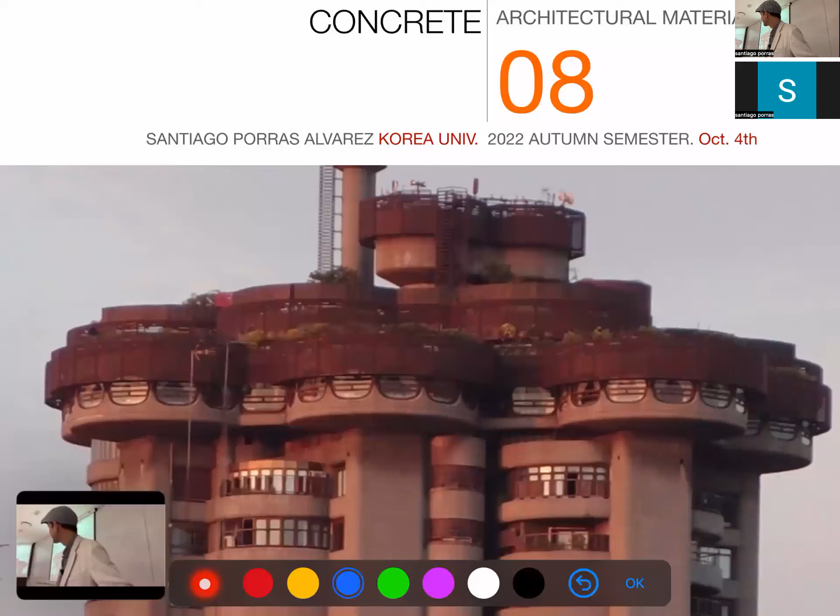So today we will try to go into concrete as a material.

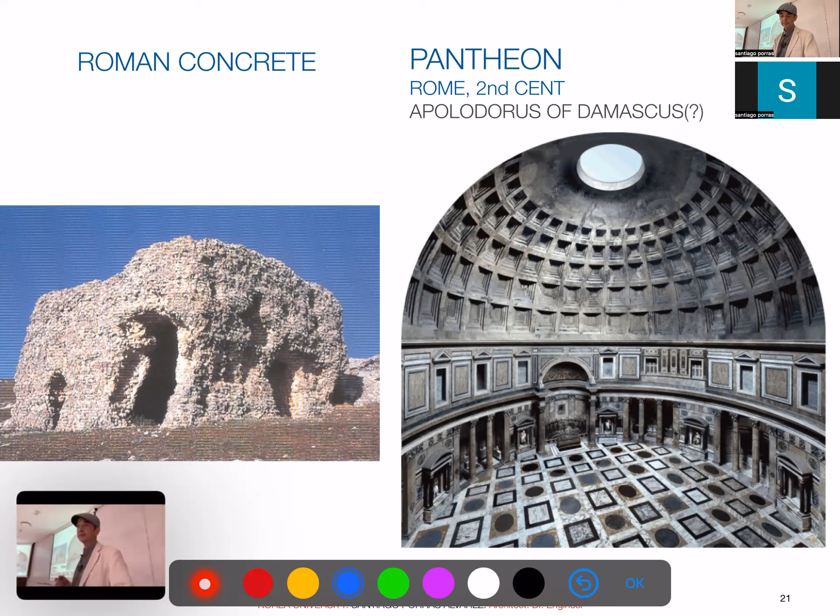Modern concrete actually started to be used at the end of the 19th century, into the 20th century. The first project trying to use the plastic possibilities of concrete was by Erich Mendelsohn, a great architect: the Einstein Tower in Potsdam.

Ironically, the technology was impossible at the time, and they had to build it in brick and then render it with cement. So the most influential concrete building is actually made of bricks, which also says something in favor of bricks.

It is engineers who really started to figure out how to use this material and who developed all the mathematics we use today to calculate it. Maillart was one of them, a Swiss engineer, and his bridges became famous — they are actually still in use.

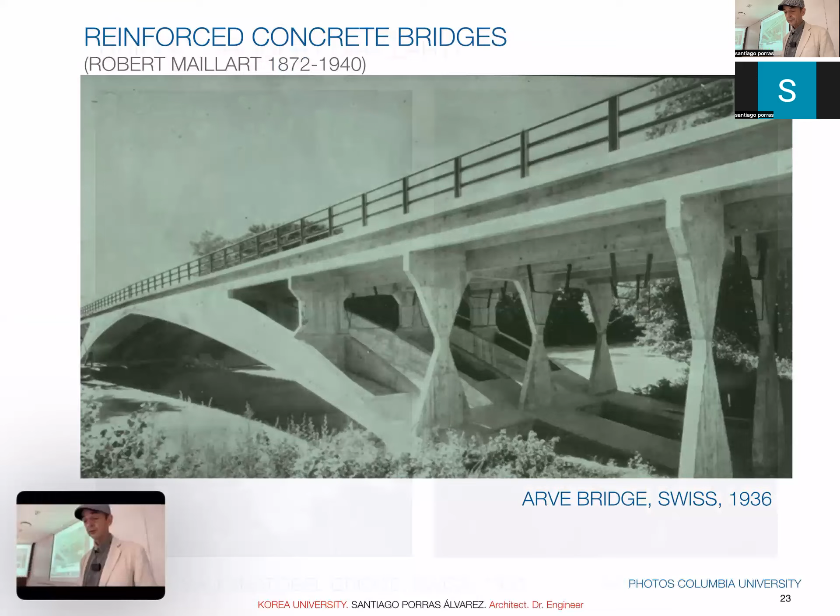Something we learned very fast is that concrete, as it has been poured and formed, creating that form was as much a challenge as the structure itself.

So whenever you have something interesting or unique in concrete, the auxiliary structure is usually as difficult an engineering challenge as the concrete itself. And this is also a limitation of this kind of material.

We have to go to the early 20th century, together with Mendelsohn, to Auguste Perret, who was the master of Le Corbusier. He was one of the first to use concrete seriously, for engineering works like factories and bridges, and he did something unbelievable.

He made a big church out of concrete in France. That was a scandal, but as often happens in France, that scandal became an advancement in science and art. And then it became like a normal material.

We have Le Corbusier's domino system and the normal skeleton construction. One milestone is 1965.

We have SOM — this Kahn is not the architect, he's an engineer. They found the tube system.

That means a kind of perforated tube, made of concrete, a concrete grid, which creates a very strong structure for skyscrapers. It was competitive with steel for about 30 to 35 floors. And again, this is a typology we can still see today.

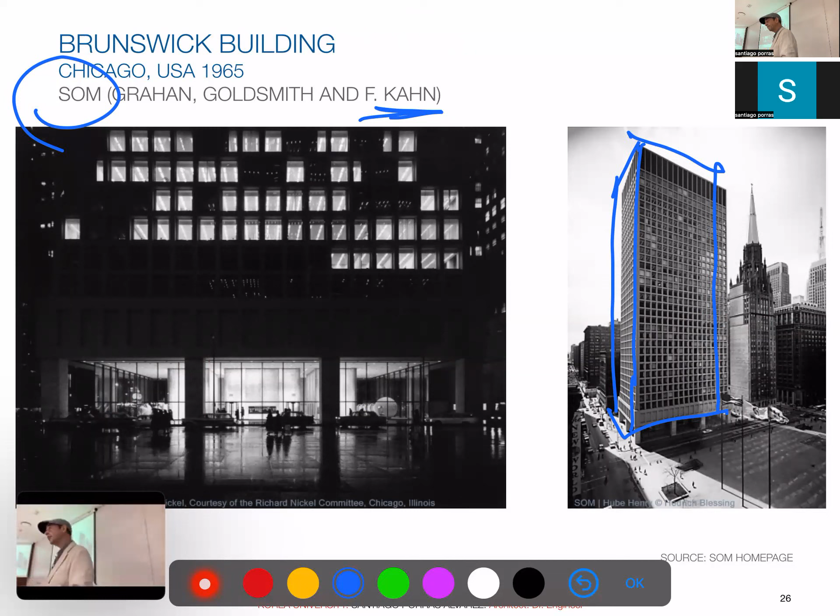Of course, Le Corbusier was kind of an apostle or evangelist of concrete, both for its structural and its plastic properties.

It went to Japan, which was also becoming very good at this. In the 1930s, the Japanese were the first to build full earthquake-proof buildings in concrete. Some old Japanese buildings in Seoul, like today's artist house in Hyehwa or the School of Medicine, are this kind of concrete structure, which was very innovative, among the very first ones. Le Corbusier was quite upset because the Japanese were too precise and it lacked the roughness he liked, but still the building is there.

Jørn Utzon, the Danish architect, did many experiments. This one, the Langelinie Tower, was not built, but it's an amazing project which explores the possibilities of concrete for very unique, unsuspected tower typologies.

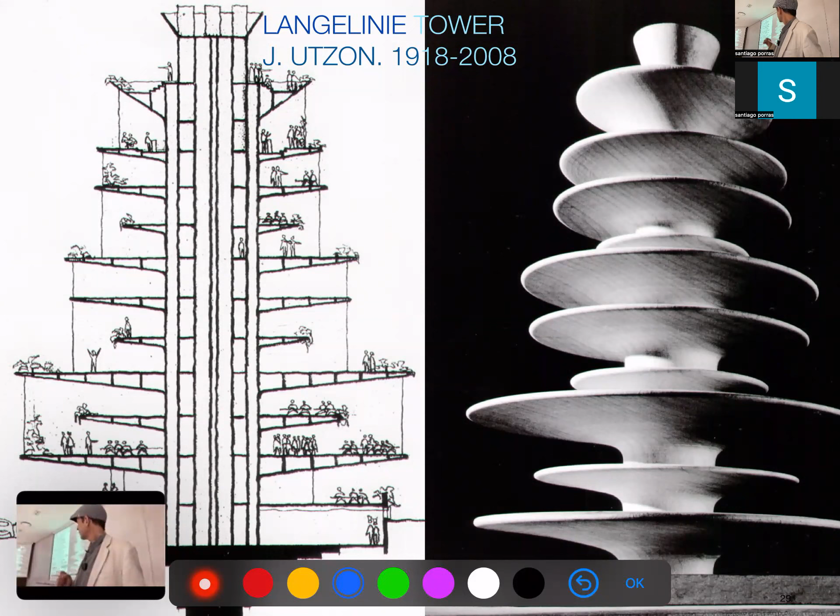I didn't put a date, but probably around 1950. Felix Candela, a Spanish engineer who went to Mexico and stayed there, created another milestone, trying to make very thin concrete shells. Probably his masterpiece was the Bacardi plant in Mexico, from 1959: a 30 meter span, 12 meters height, and just 40 millimeters, 4 centimeters, at the highest point, a bit thicker at the base. It's really at the limit.

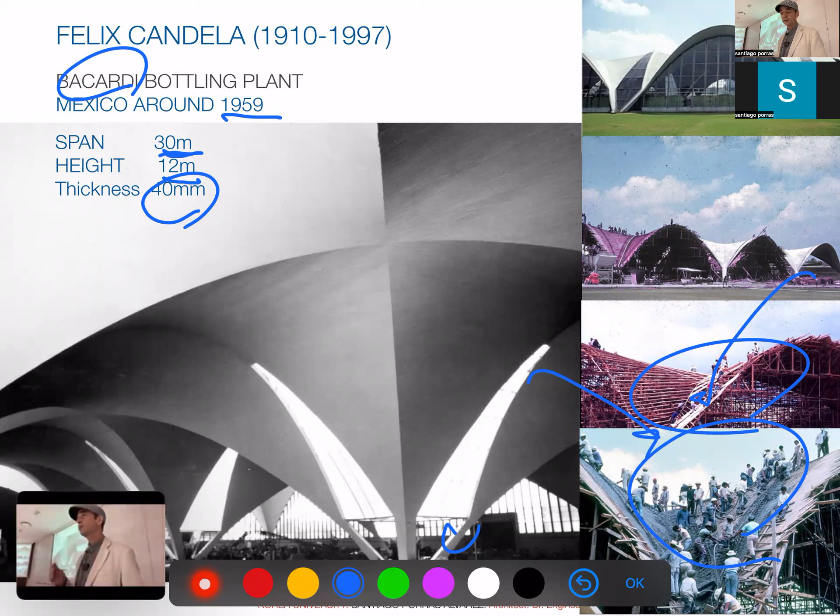From the photos you can see the forming was very challenging, and in 1959 labor was not a problem. These are two reasons why we don't see those shells so often anymore: they're quite expensive to build, and codes are now so strict that those 4 centimeters may not be enough for many issues, especially structural durability. But still it stands, and you can see it. He did many experiments, with the goal of being lighter with concrete, and had to demonstrate the possibilities to convince people those structures were strong.

Those possibilities were taken up by Eero Saarinen, Finnish American, second generation, who used concrete to create a new language of architecture, moving away from the clear engineering dome of Candela toward this kind of flying shape.

Non-surprisingly, Saarinen was in the jury of the famous Sydney Opera House project. Actually, this project was already discarded, but Saarinen said let's go back into it, and he convinced the jury to build it. Utzon was thinking of using the shells Candela proposed for the Opera House. It proved to be a challenge. This is 1957, the late 50s, the golden age of concrete exploration. But notice the time of construction: 16 years.

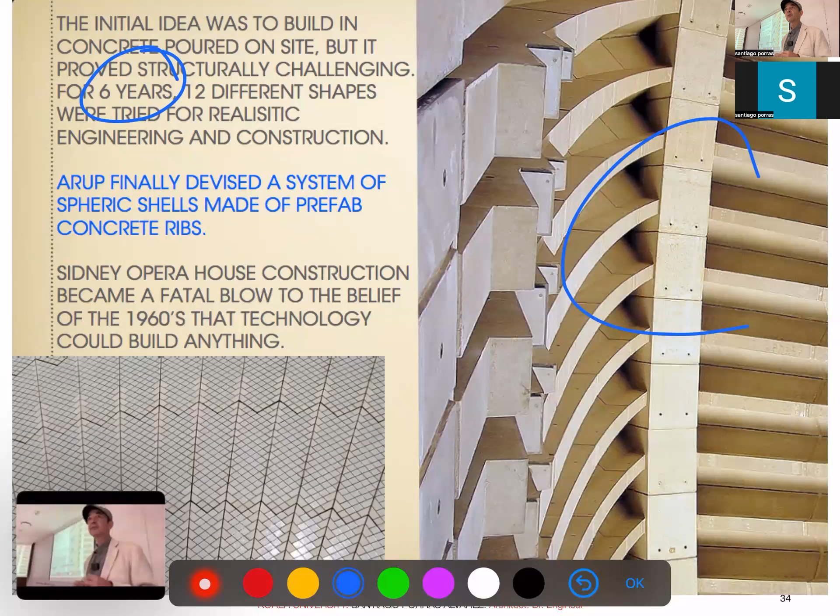The construction of that shell proved impossible for that shape and size, and engineers spent 6 years trying to find a way to build it. In the end it wasn't a shell, but a kind of rib structure. Such a scandal that Utzon was fired. In the 1960s and 70s, people would fire architects; now we just keep them and pay whatever is necessary. It was heavily criticized, but it's still the icon of not only Sydney but the whole of Australia. It marked a point where the optimism of the 1950s and 60s, that we could build anything, went down, and architects became more realistic about what to do.

That feeling remained for 40 or 50 years, until the early 2000s with the Star Architect period.

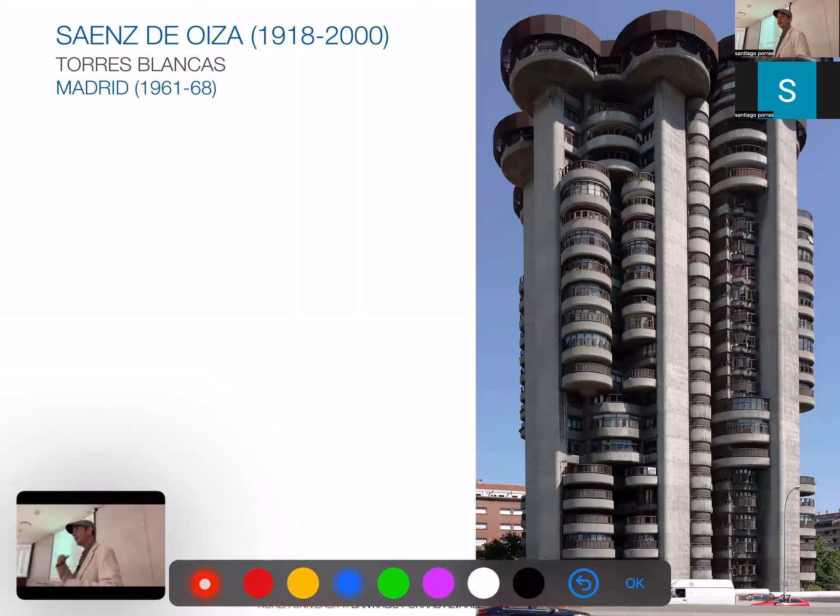Again, in the 1960s, this is Spain. This project used concrete in both its plastic and structural possibilities. Again a very long project, but not as painful as that of Utzon.

Back to Spain: this is Fisac, who was kind of crazy about concrete. He did many experiments, like using textile forms to create a very unusual, surprising, puffy feeling in something that is actually very hard, an approach that today, in the 2020s, has been recovered as something very advanced. He also went into many skeleton structures based on the structure of bones, hollow structures, or very simple prefabrication where very few units create a lot of variation.

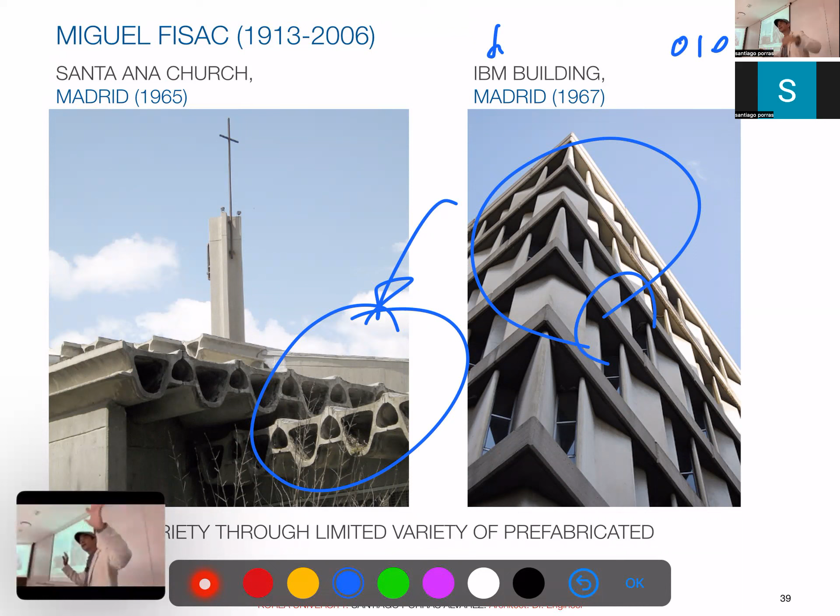IBM building, this is about 0 and 1, right? This is computer science. So he has only two positions of the facade elements, the facade being the metaphor of the computer language. And he did more, using a very simple way of construction to create a very complex shape. This was a very loved building in Madrid, but it was demolished 23 years ago. And the engineering part, not for aesthetics but for use, is also important.

Probably Louis Kahn with Komendant, who is his collaborator. Louis Kahn buildings look simple, but they have a lot of engineering there. The Vierendeel precast beams, which are like a one floor height complete, allow to have all those systems in between the floors, and also have big spans one way.

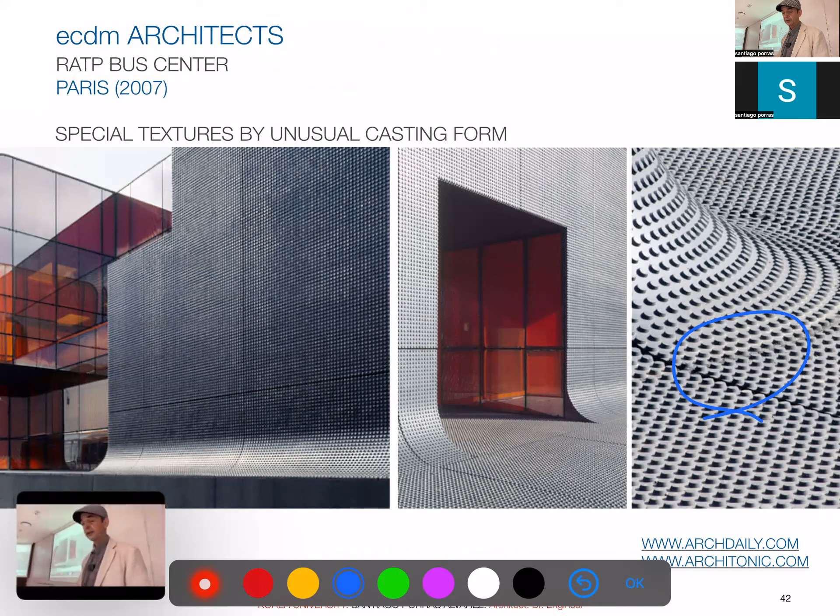Nowadays we are recovering, as we said, this kind of fluffy, soft forms to create unusual textures and light construction, different forms. We have Garcia Abril, we saw before, like more artistic, taking out of context oversized precast elements to create just a simple one-family house, or also taking precast elements out of context. And there's many more possibilities, but things we do today are probably based on those basic things we see there.

So let's go to the material. In that sequence we saw today, we will concentrate on the material, which is enough. Before I took this course, the person teaching before me used to have 10 weeks only on concrete. We'll have hopefully 1 hour, so please listen carefully.

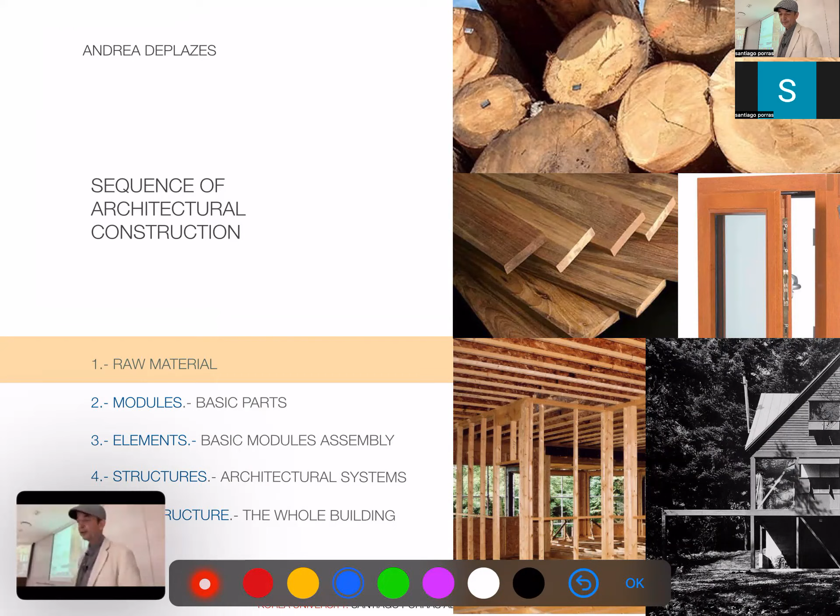Let's go into the material itself. And this is the outline. We'll stop a little bit here. This is where we have a little bit of chemistry to understand the basics, which is very important. Then we go into all the boring stuff, but it's important because knowing the nature of the concrete and how it is made allows you to understand better why we design it, which way, and the possibilities and limitations the material has. We have to start with lime concrete.

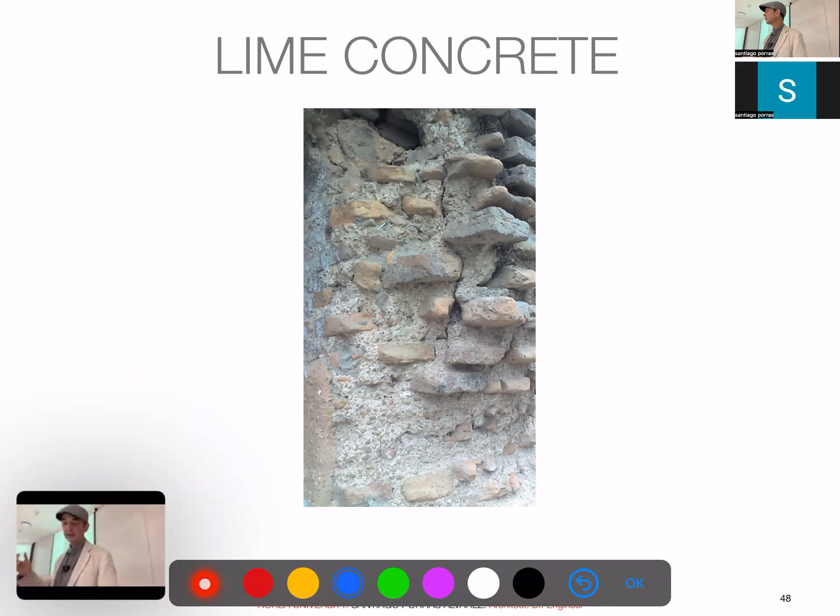And you remember lime is that pure white stone, sedimentary stone we saw, right? This is the lime, the concrete the Romans used. So you have to start from the limestone. And one way is to burn, dehydrate the stone, make it powder, to rehydrate and create a new stone, but in the shape and size we want. Furthermore, we add stones inside, so we have a very efficient use of that material because a small amount of lime produces a big amount of concrete. That's the powder plus the stones and the water, right? And that creates the concrete.

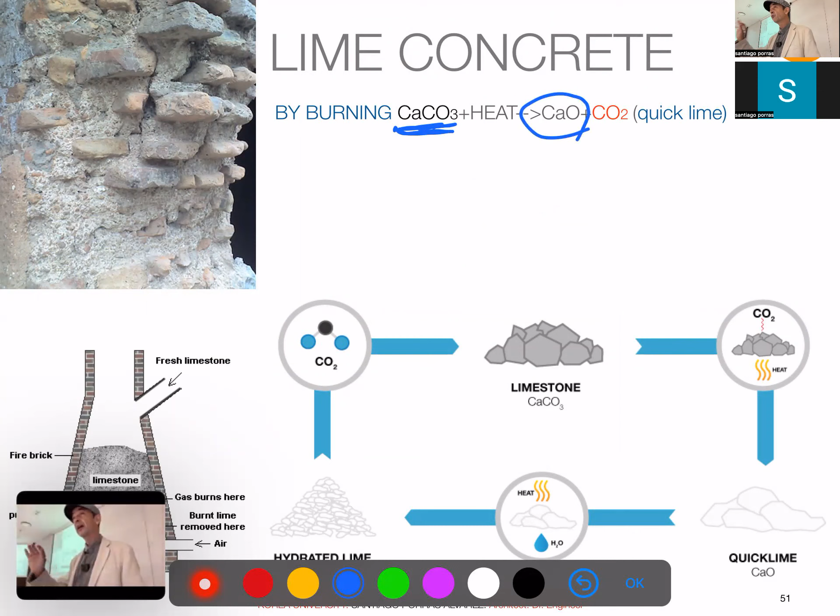This is like an archaeological remains of the Roman concrete. So let's say this is an artificial stone, man-made stone. Lime mortar, as we said, produced from limestone. And we know that limestone is produced by calcium carbonate. This is interesting because it's a very easy chemical to manipulate. The process is as you can see: if you apply heat to calcium carbonate, you create quicklime, which is a very corrosive element, plus CO2.

Environmental people get panicked with this, but do not panic yet. So this is the first time we burn in an oven, the CO2 goes to the atmosphere, there's no way around it, but we have this kind of powder, which is the calcium oxide or quicklime. If we hydrate it, if we add water, we get what we call the hydrated lime, and it releases a huge amount of heat, which also has to be taken into account. So it's a chemical reaction in which we start to reconstitute the element.

But it's not yet the same material, right? We need still the carbon. That carbon comes from the atmosphere, so actually we are capturing carbon. This is the process of hardening, this is why it takes time, it's a slow reaction. So with the absorption of the carbon dioxide from the atmosphere, we have again the calcium carbonate. And this is a process which could be repeated over and over.

Apparently, if you repeat over and over, the material degrades a little bit, but the chemistry is so simple that it's very easy to replicate. Right? This is why metals, I get off topic, but are so easy to recycle. The chemistry is just the atoms together, right? So it is very easy to recycle because there's nothing to degrade. And this is why plastics are so difficult. The chemistry is so complex, those molecules go wrong very easily.

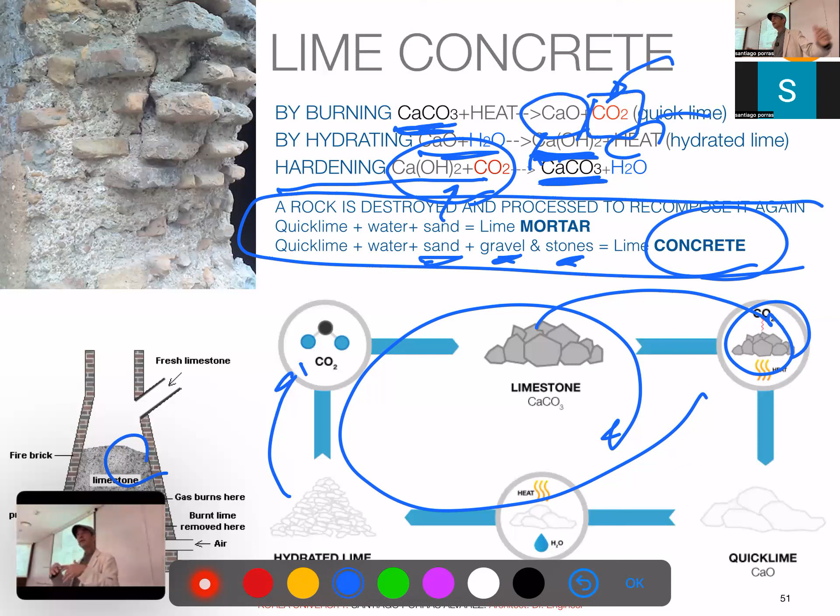We seldom use it. Portland concrete has much more complex chemistry. Not the concrete, the cement, right? So today we use the Portland cement, not the lime. And this is just made of a limestone as a base, but clays, silica, and other materials which create this kind of gray powder we know. And that was discovered to be much harder than the old limestone and much more durable, right?

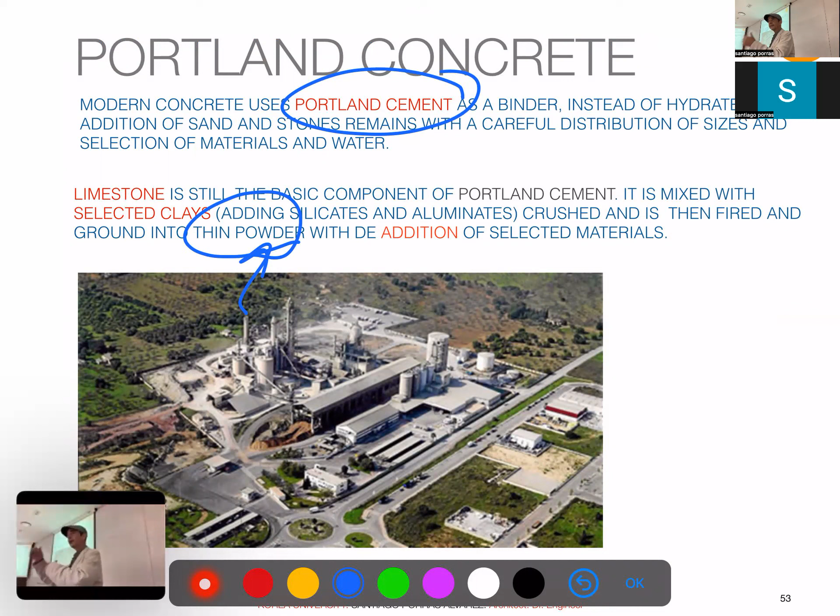So we have the lime, the clays, we burn it, we grind it, then we add other materials. We have what we call the cement, which is the basic glue for today's concrete. And then we'll add, as usual, the sand, the gravel, the stones to make use of it.

Something I put as a note is very side, but alumina is one of the additions people were very happy to put. Remember, alumina makes it stronger against fire, so still we use it. But alumina has a very nasty performance over time, and it can corrode the reinforcements, right, with other chemicals. And it was very used in the 1950s and 60s, up to the 70s, because it was very fast. One problem of the concrete, it takes like 1 month for it to harden to a safe stage, right? But alumina could do it much faster. So it was very popular.

We are much more careful now. I say that because if you work in old buildings, renovation is very common, and we have plenty of those. Probably Korea was using it until the 80s, even later, right? Because here things come a bit later because of the development. Always be careful and test the nature of the reinforced concrete you use to see if it has any kind of damage, right? We do it as a base when we work in Europe or America in buildings from that period.

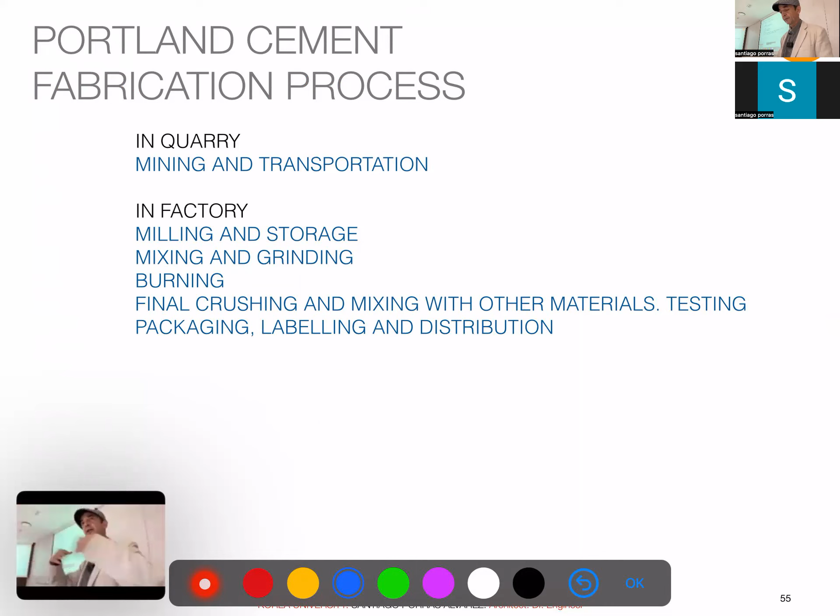So the fabrication process is, I will go fast here because there's not much to understand. We quarry the clays and the lime, we grind them, we burn them, we grind again, we mix with the materials, we have the powder ready for working. So we take, as we saw in the bricks, but this is limestone, right? Limestone is like a real sedimentary rock, and you need dynamite to get it there, to start using it. That creates those rocks which are transported, right, for then grinding them, mixing and making the powder.

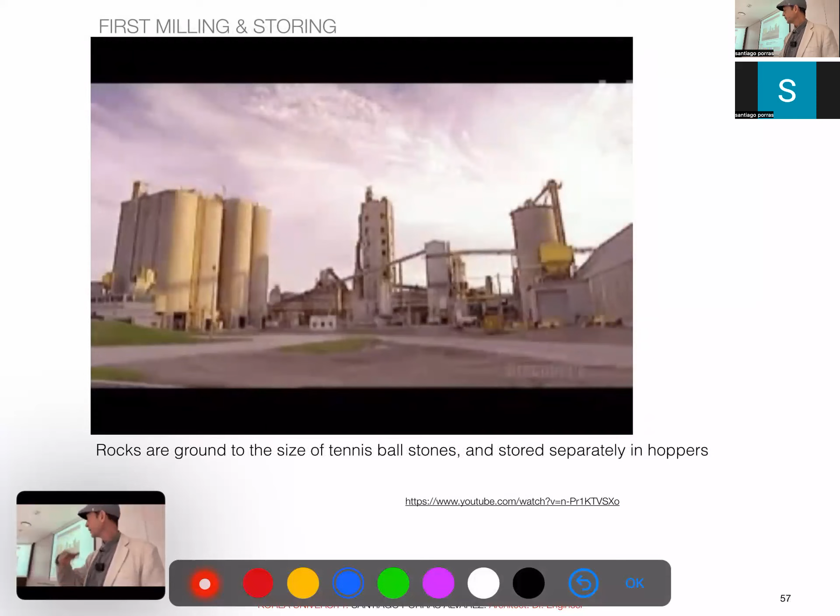So once you have them, they are stored in this process of grinding, storing, and then they will be mixed, right? There's a constant spray of water to keep the dust from billowing up and settling on the chutes. Fortunately, there's no sound because it's a really noisy part of the process.

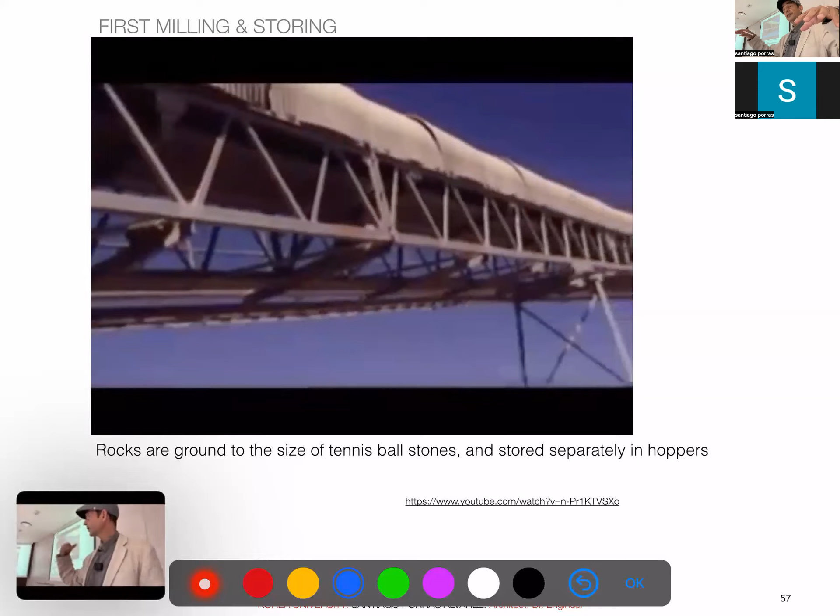So very thin grinding. It's not yet the final grinding, but then it is transported and stored because different kinds of cement will use different mixes of clays, as we saw with bricks, but in this case, it's even more exaggerated. So once they are stored, they are mixed in the proportion necessary for the given kind of cement which we want to fabricate.

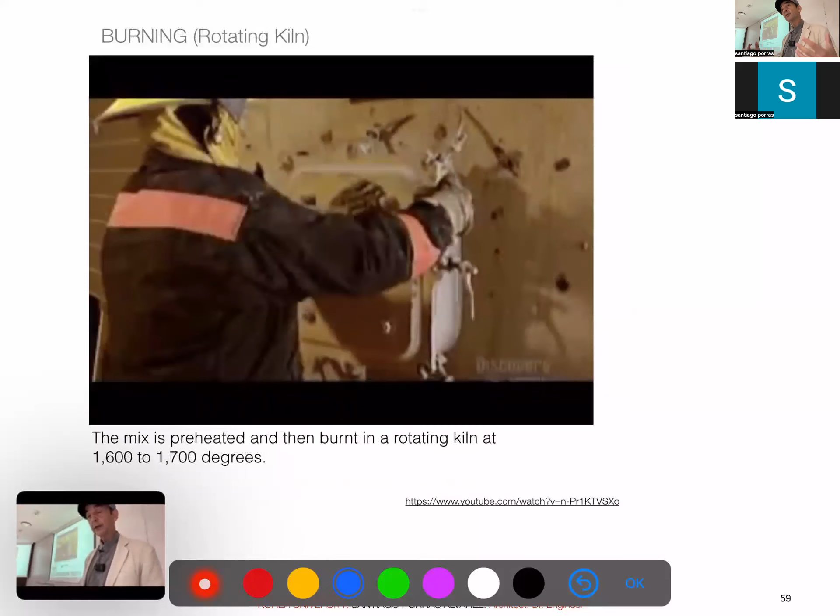Right. And this is other, like pure silica and other materials which are added to the mix. Well, and then it is all burnt together in a very strong, huge oven, which is rotating. It's like a huge tube in which things move slowly and are mixed. And the temperature, you see, it is enormous, much higher than the one we saw in bricks. That means the amount of energy we use is much bigger.

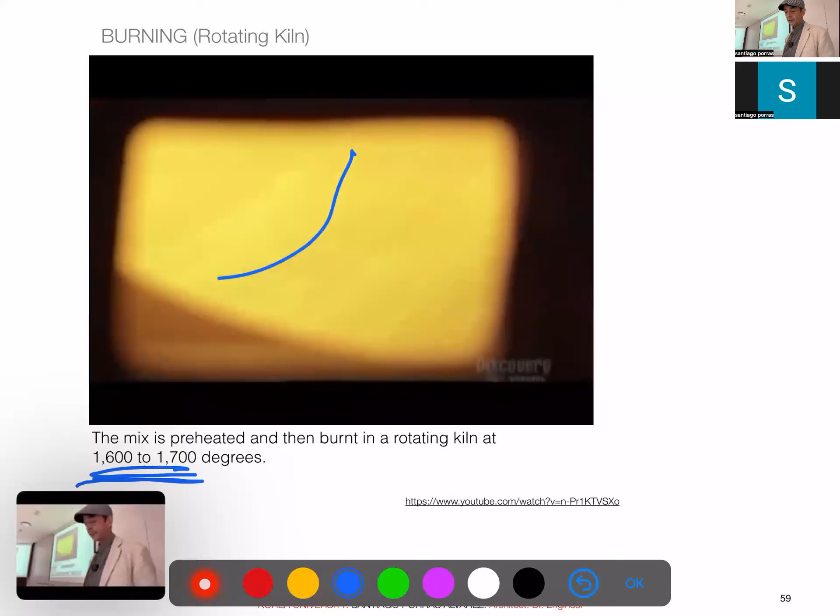And those huge tubes are the typical ovens. This is where the gas with the fire goes. Those are typical of cement production. What goes out is something we call clinker. And be careful, because we call clinker that very high temperature brick, and we call clinker the burnt result of the cement production, but it's two different materials.

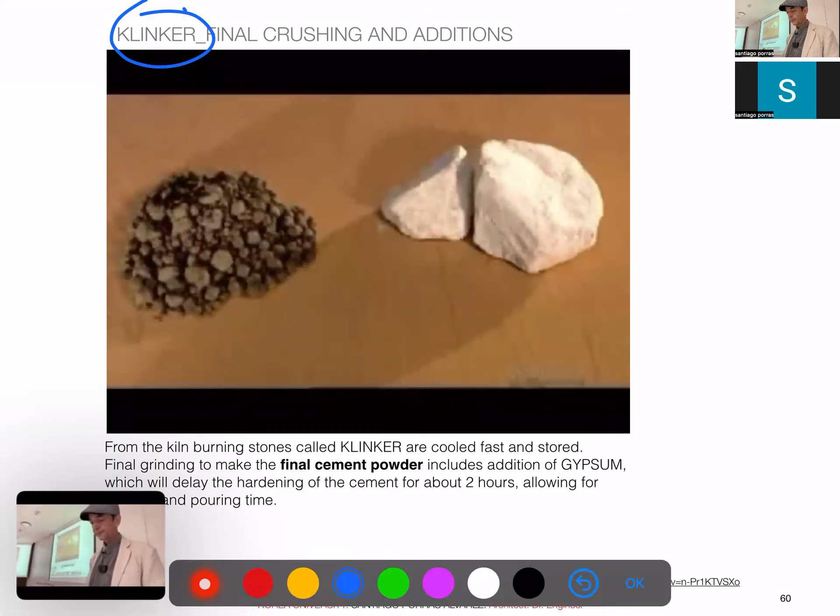This is very finely crushed into that thin powder we know, and then still has a bit more additions, so gypsum and other materials to stabilize those much more complex chemical reactions, so the material performs as we like. Okay, so now we have that gray powder we all know. This is like the basic glue, but then we have to add the water and the other materials to create it.

In small constructions and the developing world, they still do it by hand, but mostly today, especially for structural concrete, we do it in a factory because we need a much more careful result and good quality of the material. Basic components are water first. I will not speak more about water because, although it is one of the chemical elements we are most ignorant of, we still don't understand it.

What's important about water, it must be pure, without salts and without sulfurs. So we always need to analyze the water used in concrete. In the factories, they have a very careful system for monitoring and checking the chemistry of the water, as neutral and as pure as possible. And of course, water is the element which creates the chemical reaction. It's part of the cement hardening.

Then what we call the coarse aggregates: sand, gravel, sometimes stones, not so much stones because in structure we don't really want them. It's what allows us to use as minimum a quantity as possible of that very precious, very expensive cement. And we will comment later on cement, Portland cement or just Portland, which is the glue. We have plenty of different cements. Fortunately, the concrete factory will take care of it, but you have to be aware of it.

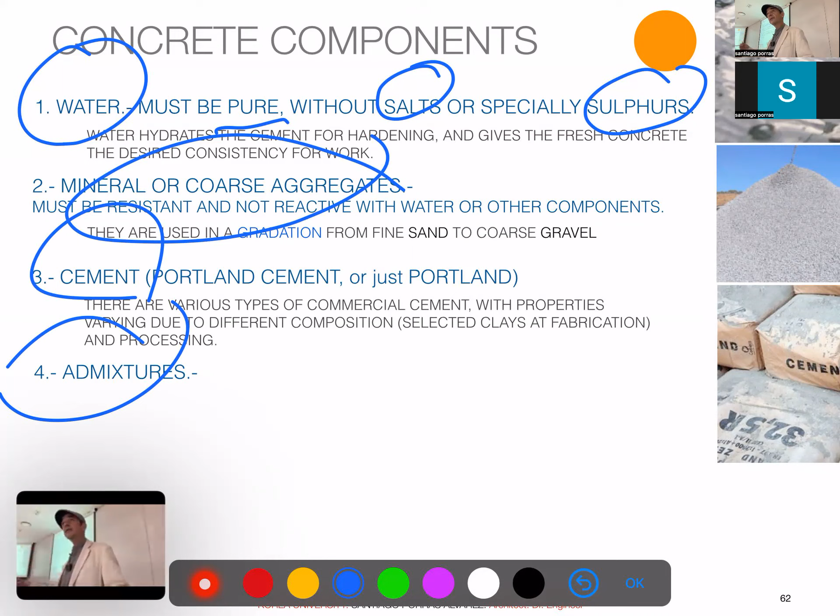And then not the chemicals we add to the cement, but some other elements are often added to that concrete mixture, and there are plenty of them. In English, they have admixtures, which are reactive, and additives, but that's kind of a linguistic thing. And there is an infinity of those.

Fine aggregates, mostly sand. Best is river sand. Otherwise, we have to wash it, especially sand from the sea, because of salts. And it must be free of clay. Clay particles are less than, say, 1 or 2 micrometers, like 0.001 millimeter. So those fine particles we try to avoid at all costs.

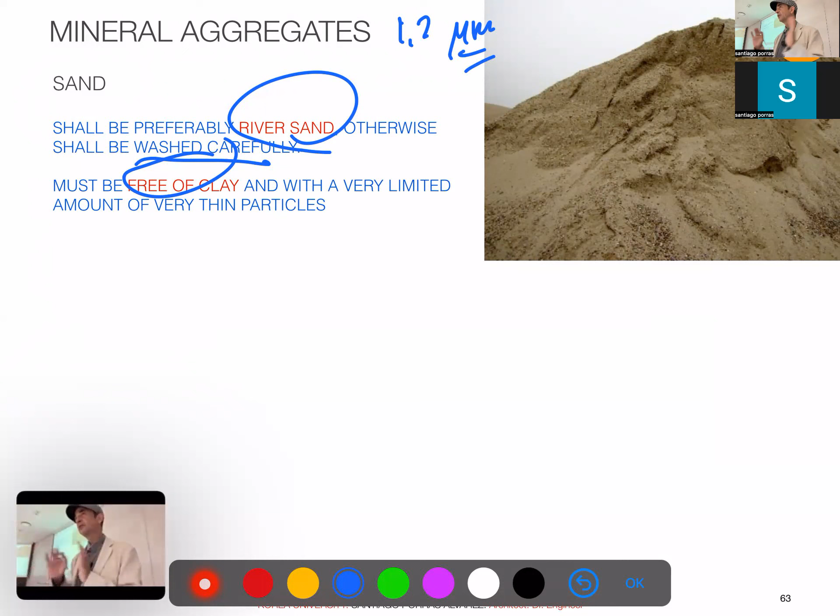Thinking that this is just a filler, something we fill with to use less cement, which is the expensive part. Do you understand the question? So I put those stones. They can be rounded, like taken from the rivers, or can be crushed, like from quarries and so on. What happens if we use one instead of the other? If we use different sizes or the same size?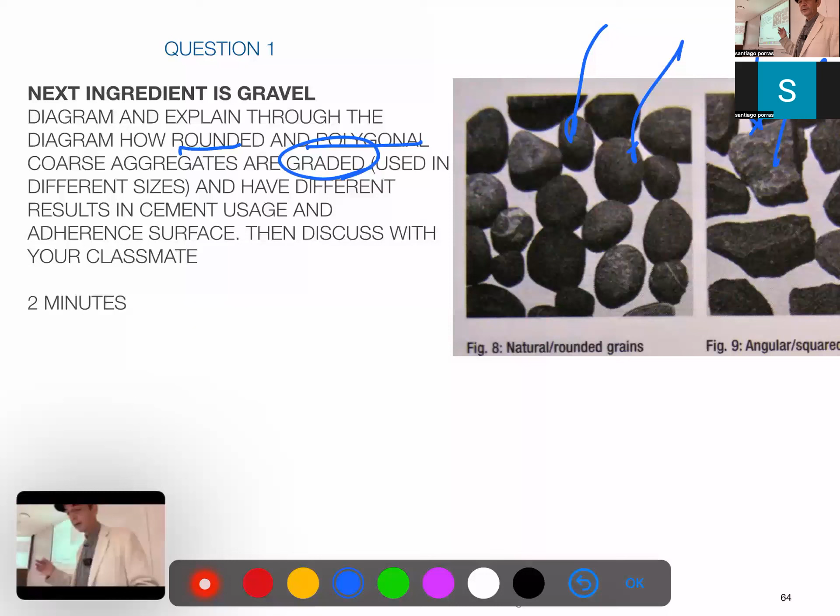Okay, so let's go into it. So the aggregates can be of many types. And the important thing is first the size. Usually we use a maximum of 2 centimeters, sometimes 3 centimeters, but if we have reinforced concrete especially, we don't want to use very big stones.

Your activity sheet, you have it already? You?

And of course, we need hard, compact, regular stones. This is why curiously granite is not so good, because it has these small sheets of mica which do not help, right? So rounded elements will provide more compactness, so you will have less cement, more economical in that sense. It's preferred, but angular ones will have more area of contact, so the adherence will be better. So there is always a trade-off there. They are both okay. Of course, if you wash the concrete, they have a different aspect, right?

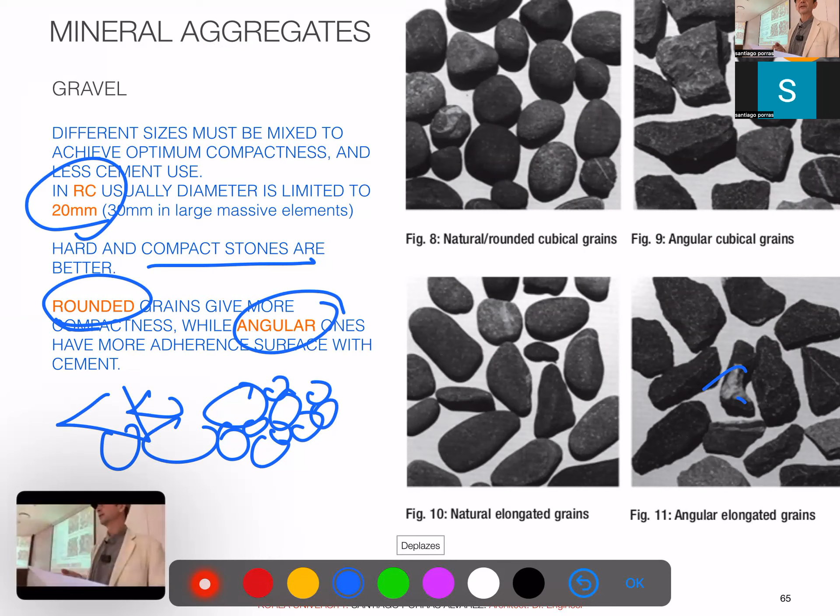It is different with crushed material and with random material, but that perfect grading will give you much better compactness. If we have only one size of gravel, you will use a lot of cement. If the grading is not very well done, you will still have a lot of gaps. So all the science of grading is to have as much compactness as possible. So good grading will use less cement, be more economical, but we also have much more area of contact. So the cohesion will also be stronger. This is why grading is so important.

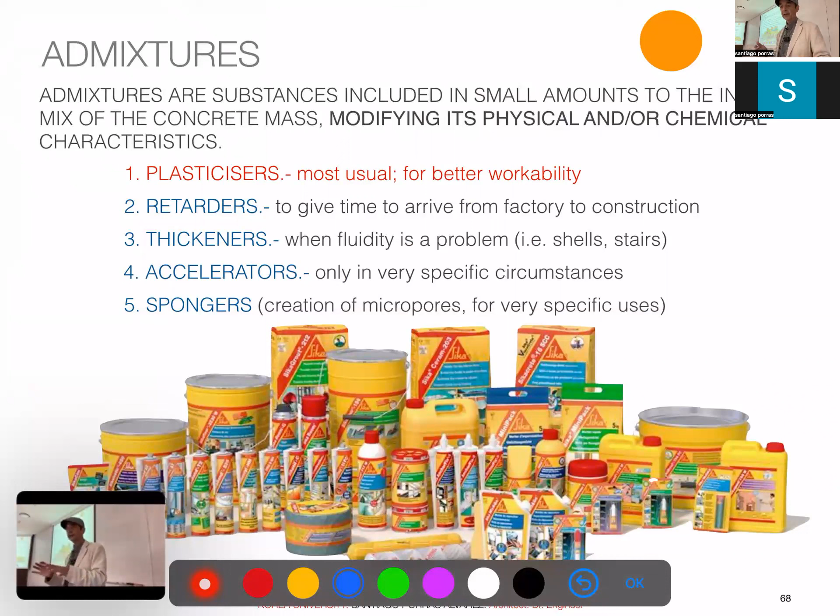Admixtures, and there is a difference between admixtures and additives. It's mostly for English, I don't know about other languages. Admixtures are chemicals or other materials you add to the concrete which affect the chemical reaction. The most important and the most used are the plasticizers, which make the concrete mix workable, but without falling apart, right? So enough to go into the form and take the shape, but without being too fluid or too hard. This is almost universal.

Then you have something to make it harden later. You have something to make it thicker. Imagine you have those shells or something in which you don't want the fluid to pour around. You have accelerators, sponges to create porosity and so on. There's plenty of those. This is the most important. Well, I took Sika, in Switzerland, one of the biggest makers. They have a catalog of dozens of those materials.

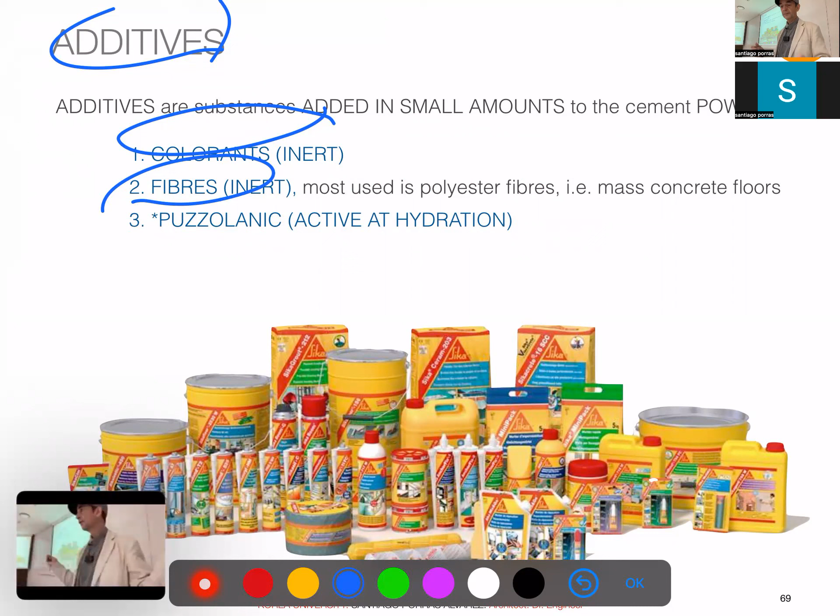Then additives usually do not change the chemistry or do not interact with the material itself. Usually colorants or fibers; sometimes instead of reinforcement bars we use fibers, right? Or pozzolanic, we will see later. I would put it in admixtures, but okay. It's kind of a powder, which is interesting in the final result of the concrete.

The dosage is different from grading. Grading is just for finding the proportion of those sizes of gravel and sand. The dosage is how much we put of each material. Remember, in mortar, we spoke only of sand and cement. Water is mostly by feeling. In this case, we have water, cement, sand, and gravel. And here the proportions are vital, because we're speaking of a very delicate structural material, we want to be sure of the material we are fabricating.

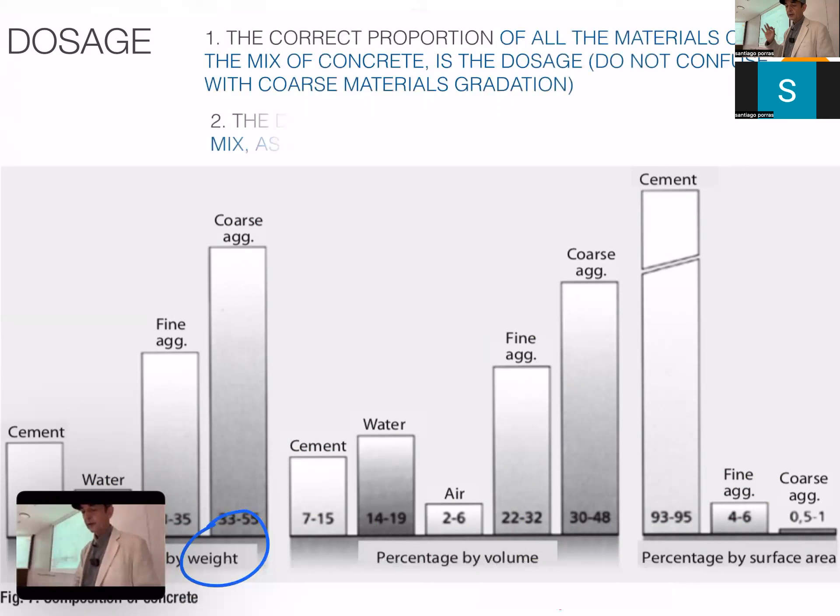There are many ways to do the dosage. Usually we do it by weight. We will not go into much detail. You don't need to memorize things, but it is good you are aware of the usual ranges for the usual concrete. So usually for normal concrete, I'm speaking of everyday concrete, not high strength concrete, which is very specialized.

Cement usually is 250 to 400 kilograms per cubic meter. Less than that will be weak. Over that, still we can use, but it will be much harder to control the reaction, the cracking, the heat, and all that. We go almost to the high strength concrete, which is probably 800 kilos or 1 ton. So this is the most common range of the everyday concrete.

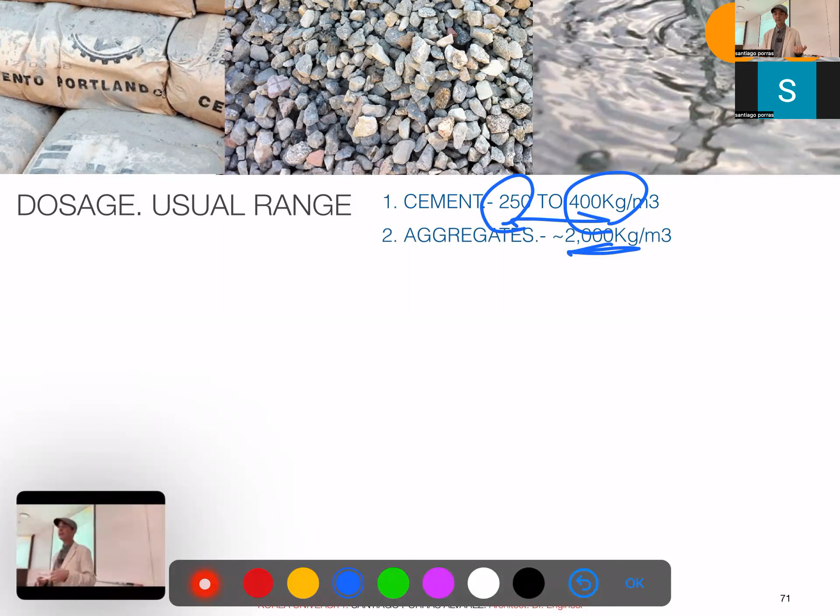Aggregates, which is sand and gravel, about 2 tons, right? By far the most, as we said. We want to use as little cement as possible to have the result. And then water can change this, about 150. That's a very small amount, but it's important. Less water and the reaction doesn't complete. More water and you have too fluid material and will not have the result we want.

The differences are very clear, right? And it is good you're aware of that, because sometimes you can spot errors, especially when the concrete is done on site. It will not happen in a factory, but if you're in a developing country, cooperating in some country in which they do it on site, at least you should be aware of the main numbers, right? Just the range. Remember that stone is about 2.5 tons per cubic meter, and altogether make this kind of total weight, which is also one checkpoint.

Once we have the mix of the concrete, it usually goes with a truck, the Remicon, and usually the time limit is 2 hours. So very important, you have the certificate of the time getting out and when you pour it. If it is late, it has to be disposed, which is a problem because once you dispose, it hardens, it's very hard to clean. So when you have a construction site, especially in big towns, it's always a challenge to be in time. This is why you still have concrete factories within the city of Seoul.

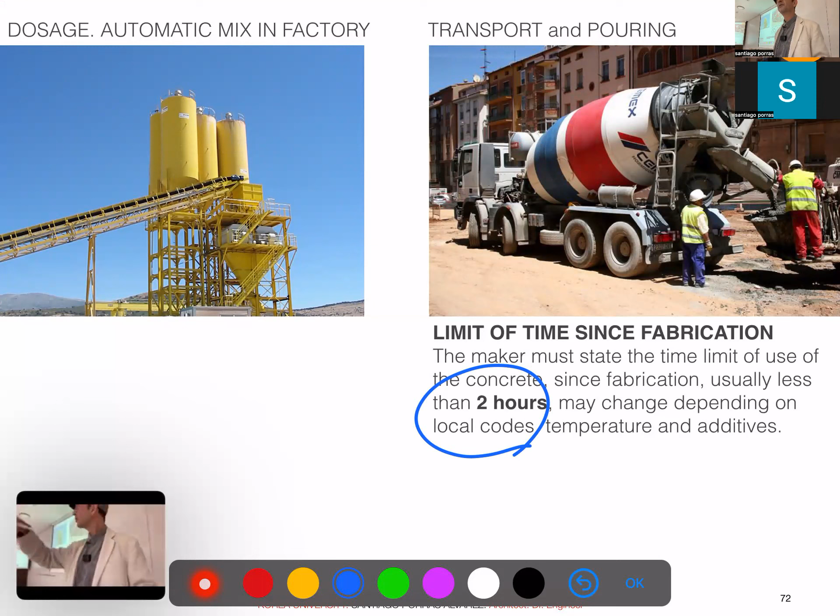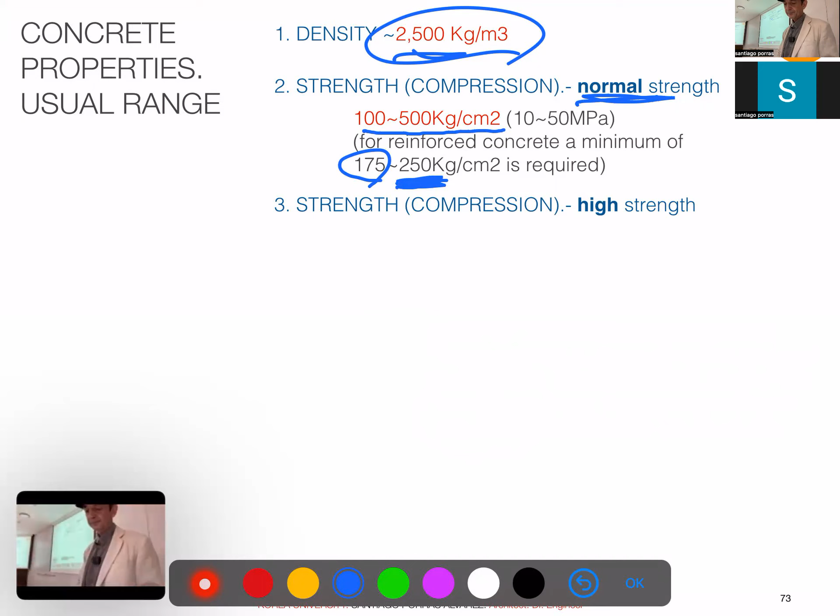Then about the properties. As we said, the density is like the usual stone. It's basically limestone with gravel and sand. The variation will be mostly by the kind of sand or gravel we use, because the stones can change in density. Compression: the usual concrete is between 100 and 500 kilograms per square centimeter. For reinforcements, minimum is 175. But nowadays, I think the Eurocode in Europe considers only concrete over 250 kilograms per square centimeter. I don't know the standard of Korea, but about 200, 250 is the usual for most common everyday concrete. And then the high strength goes much, much higher, right?

There is a space between 500 and 800, it's an ambiguous area. If you go to the pain of adding a lot of cement, you go to much more strength, but you will always need special laboratory work and really specialized workers. And this is what you see in the columns of high-rise towers of 50, 60 floors, because with this strength, it becomes competitive with steel. But this is very specialized, right? I personally have seen it, but I have never used it. But I have an idea of the problems there.

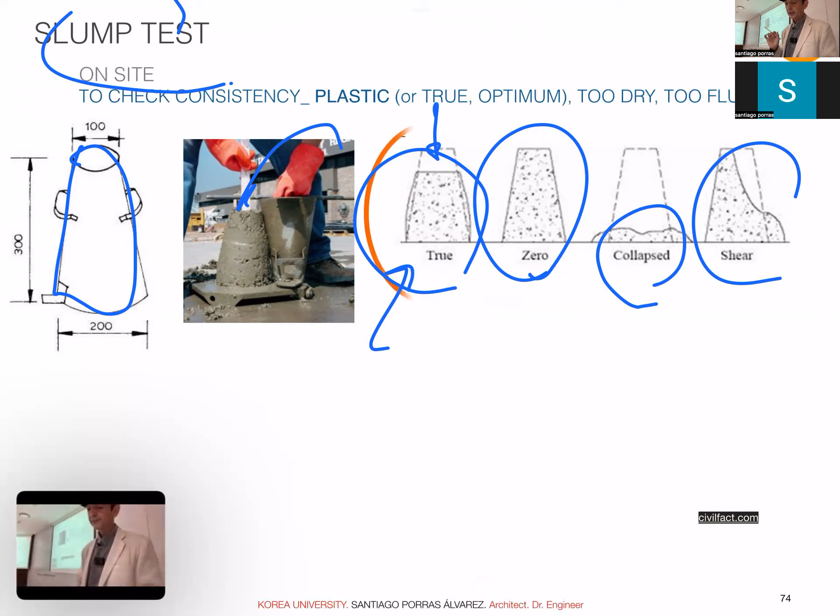Another thing which is done in structures is the statistical test. Usually for every truck coming to the construction, depending on the strength of the concrete and the safety regulations, between 6 to 10 samples are taken for each truck, and they are taken to the laboratory, perfectly prepared, and they are broken 7 and 28 days later, right?

28 days gives us the intended strength. 7 days lets us know if there's some kind of problem. We can just check ahead, right? But see that 28 days is the standard time for the concrete to be hard. 1 week already is strong, but it's not its full resistance. And then it is broken. The laboratory makes the calculations, and they send it to the engineers, architects, and you see if that works. And of course, if we use like a 250, it is never 250, right? Usually it will be a bit more. Seldom it is less, but if it is less, you have to make additional tests.

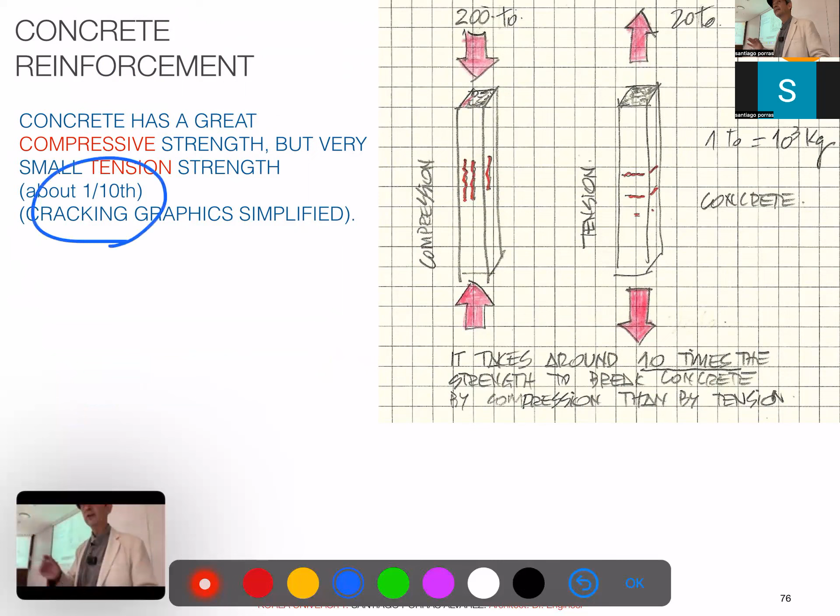Okay, then we have the reinforcement, because you can use concrete as a mass often, but we put reinforcement, and probably you already know concrete is very strong in compression, but very weak in tension. Still, it has some strength. So the strength is about 1/10. We usually do not use it in calculation, but it's additional safety we have.

So if we compress, say, one column may collapse with 200 tons of weight, usually because of the shortening. Actually this will be fattening in the center, right? Shortening, fattening a little bit. So little we cannot see it. This is why the cracks are vertical. Very important. Vertical cracks parallel in the center of the column.

Memorize it, visualize it, put it in your mind, because you have to be aware of it. Not only because it comes in the exam, because many collapses came from ignoring this, okay? Whereas in tension, it will thin in the middle and cracks will be horizontal, perpendicular to the tension. So to have a more versatile material, we put steel reinforcements. And this is something you all know, so I will not explain, right?

Steel and concrete work well together. Water in concrete is an annoyance because water oxidizes the steel. But since the water goes to the concrete for the chemical reaction, it's kind of safe. And the heat expansion is not the same, but it is quite tolerable. They can just expand and contract together. So it's kind of a dream combination that engineers started to test like 100 and something years ago, right?

And this is what we call reinforced concrete, or RC. The use of steel to absorb those kinds of tension stresses. Another thing is that the concrete is covering the whole steel bars, so concrete will protect it against corrosion. So let's go to the rebars. We don't need to speak too much because we already are experts on steel.

So this is a mild steel, and rebars have some kind of a texture. You see they oxidize a little bit. There are opinions about this. Steel should be clean, but a little bit of oxide, usually people do not care much about it. A lot of it you will have to clean, but ideally you use them clean, okay? So usually this kind of texture on the bars, we call it corrugated. That's the texture of those bars.

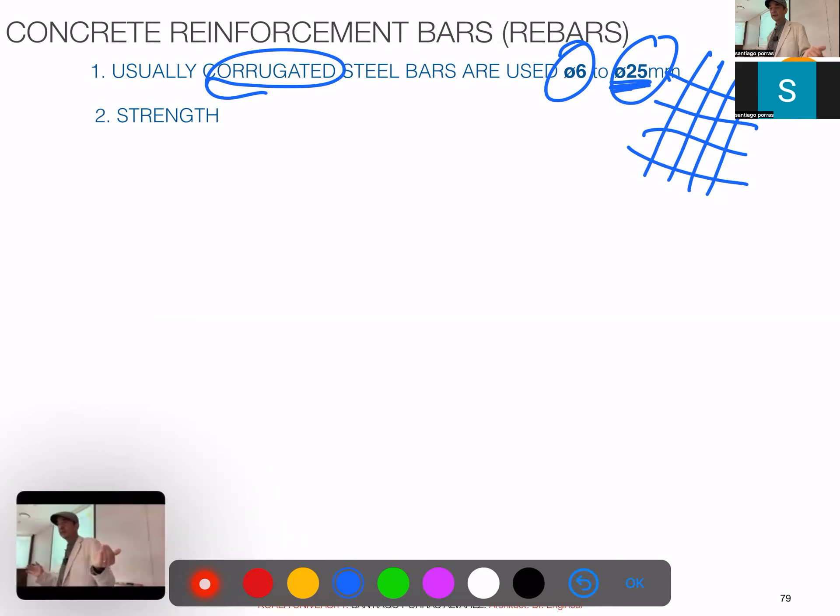This will help having more connection, more adherence to the cement, and usually between 6 and 25 millimeters. If you have pre-welded nets, you can use thinner, like 3-4 millimeters is also very common, right? And over 25 millimeters, they are so heavy and so hard to work that you will see them mostly in civil engineering. Actually, 25 millimeters are very seldom used. And 30, 35, and 40 millimeters, you will see in bridges, in big domes, in nuclear reactors and things like that.

And the strength, we're on the high side. Between 4,000 and 6,000 is the most common, right? We said since the material is very small, it's very easy to control the strength. So we'll always have higher strengths in small bars than in big hot formed shapes, right? So it's probably the strongest steel you can use. One thing which is interesting, please remember, mild steel has the same strength in compression and in tension. Don't say steel is weak in compression, because you will fail a quick exam, which is very easy, right?

So if you have concrete and steel together, if they're compressed, they will both shrink together and the steel will be pushing together with the concrete. If they are in tension, we just neglect the concrete and we consider only the steel working in tension. But in compression, say a column with reinforcements, if it is compressed, both steel and concrete are shortened and they are both pushing, collaborating. And this is why you put bars in compression, and this is why we use them also in columns.

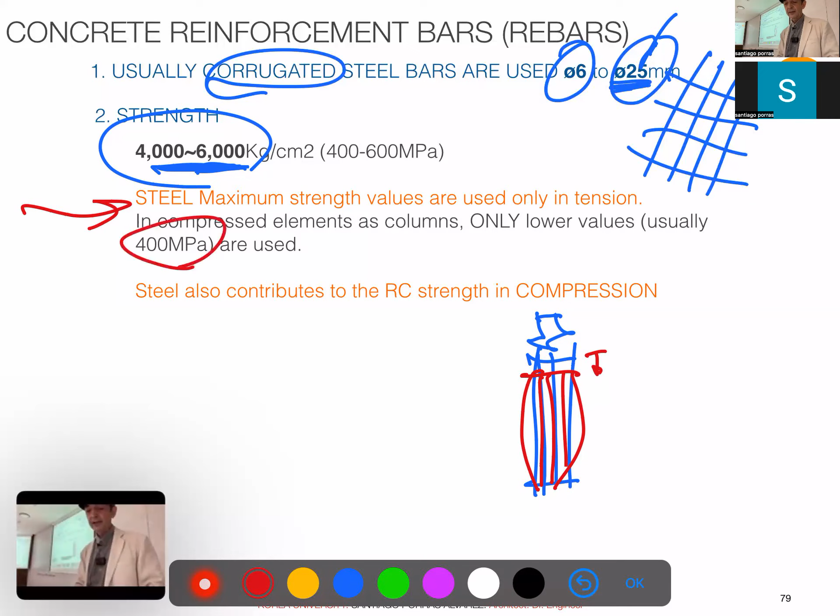But curiously, in compression, we usually go to the minimum value, only 4,000. We can use a stronger steel, but we calculate only 4,000. This is why we reserve those very expensive steels only for beams or elements which are in tension. And this comes to the question, and this is a difficult question. If you are able to reply to this, you know more than some of your colleague engineers.

Why is that limitation in compression? Why, if we use a 6,000 or 600 megapascal steel bar in compression, will we calculate only 400 megapascals when it is in the reinforced concrete? Can you think of any reason? I gave you a hint with the diagram before, and surely here Young's modulus may help you.

This is a nice exercise to elaborate on what we commented the other day, but if it is beyond your understanding, don't worry, you can survive without it. But it will help you much understand about elasticity and the performance of materials and why many things are done in the way they are done. And understanding things is always good.

Any idea why? I will explain next week with the questions and answers. Remember that in compression, this element will shorten, and both concrete and steel will shorten together, the same amount. This is just by need, right? They have to go together. So if the column becomes 3 millimeters shorter, both concrete and steel are shortened 3 millimeters.

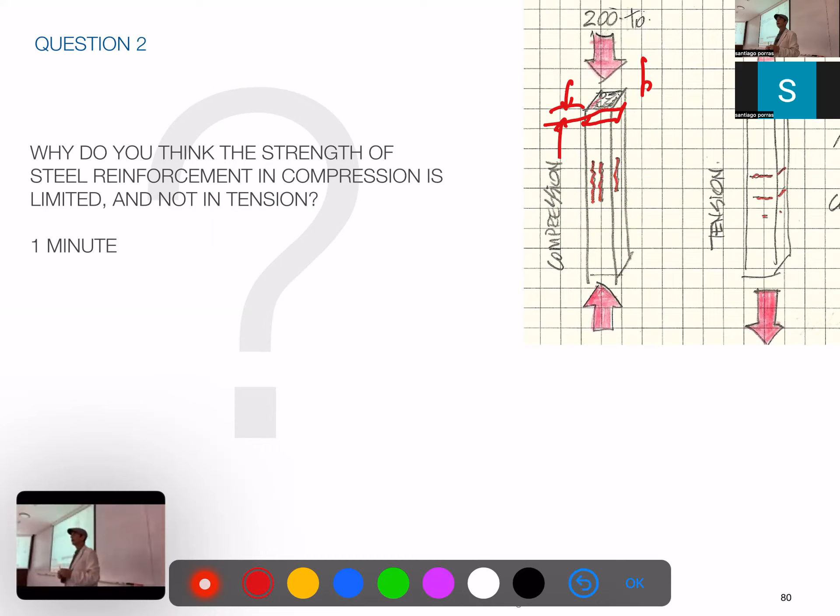Well, as usual, comment whatever you think is possible. Otherwise, just copy the diagram so at least you have the image in your head, because the point, the tip, or the reason is this diagram, this kind of joint deformation.

Good, let's continue. So reinforcement, again, needs to be protected against oxidation. Usually, if we have one section—you're familiar with the beam or the column with the reinforcements—the thicker the covering, the better the protection. In general, at least 2 to 3 centimeters is what we consider. In very aggressive environments, you can go up to 10 centimeters. But if you have a lot of distance, that's a very thick part of concrete without steel, so you may need additional secondary thin steel to avoid cracking there.

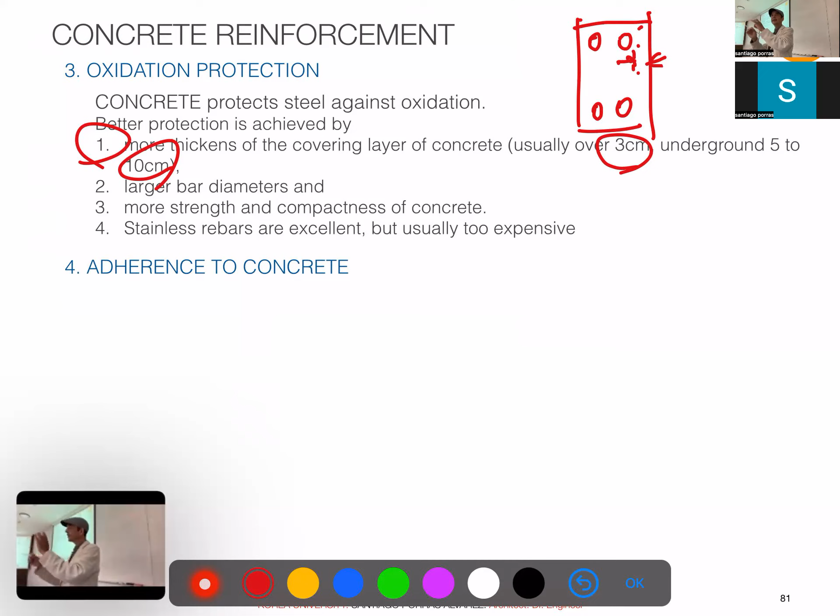Of course, thicker bars will oxidize less; they have less area in contact with the corrosive agents. And if the concrete is stronger and more compacted, it will give more protection. So 300 kilograms per square centimeter, or say 30 megapascals concrete, will protect better than 20 megapascal concrete, right? And finally, if we have very rich clients, stainless rebars are fantastic. I have the stainless steel industry trying to sell me, but I never found a client wanting to use them. But still, they may have their place.

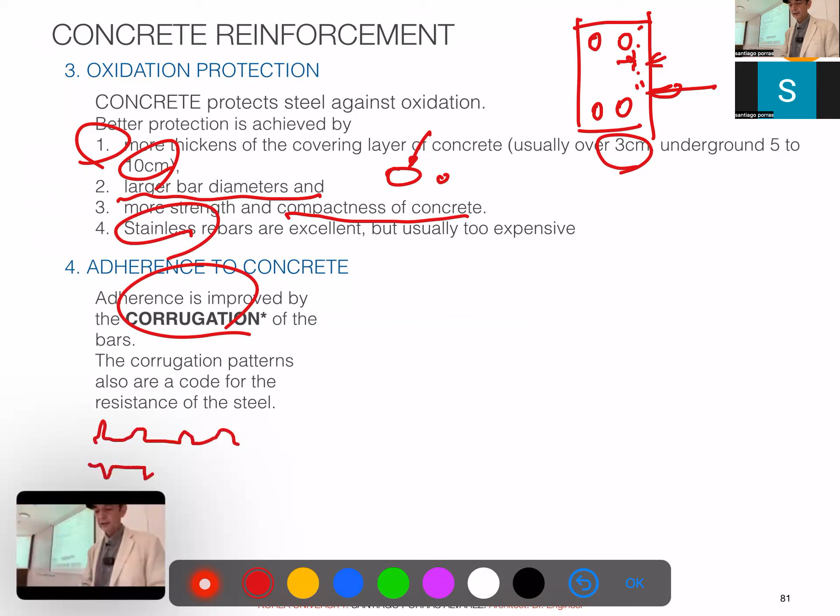The adherence—you know, concrete, or cement, is like a glue, it sticks. But you want to be sure that connection is as good as possible. So the corrugation, this kind of texture of the bar, is what allows bigger strength. And the patterns usually have the resistance encoded. So in Europe, this will be like a 400 megapascal, and this will be like a 500 megapascal steel, just by the shape.

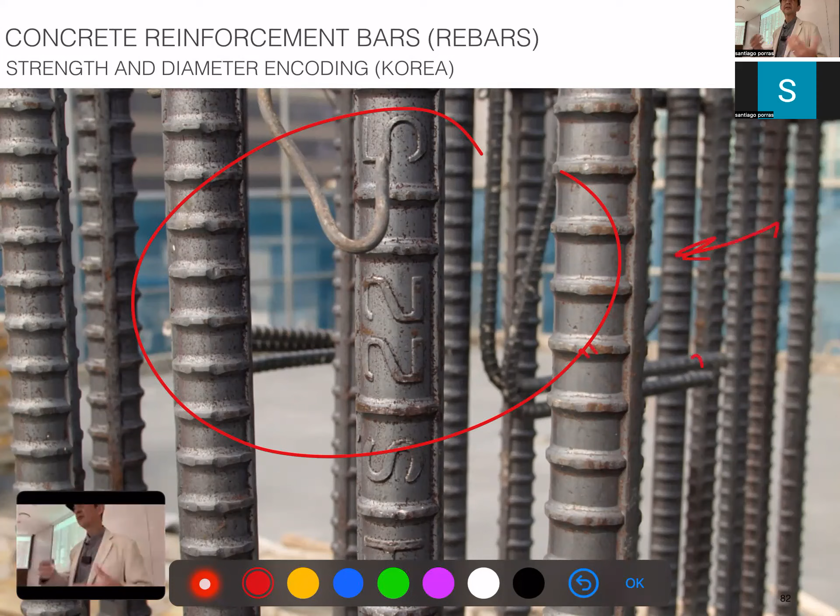So I will show you just a fast slideshow to see how this works on site. This is the construction of this building. Okay, so you know how this looks inside.

The reinforcement horizontal is done by hand. Usually the bars come, they are cut, and they are placed by hand according to the construction drawings. Same for the vertical—usually they are cut and placed by hand with just small steel wires. So it's very, very artisanal. Sometimes they prefabricate and you have like the full set of steel. This is done also, but in Korea, I see always doing it by hand.

If it is not flat, like vertical or horizontal, you need some form to bend those steels. This is from the DDP construction for this kind of wobbly concrete buildings we have in the perimeter.

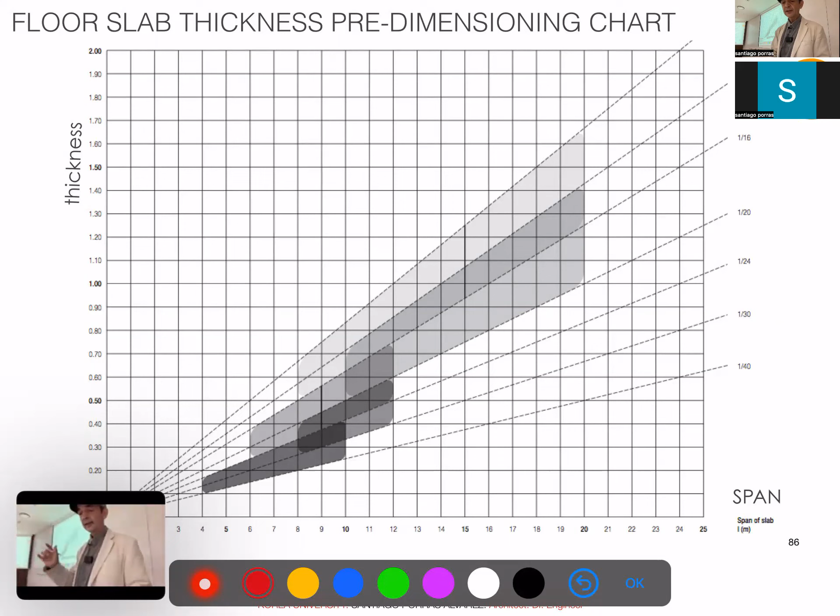As we saw with the steel, we have some kind of basic pre-dimensioning for your projects. You have some kind of realistic section. This is for slabs. For beams, it will be a bit higher, probably 30, 40% more. And you see, this is kind of exponential, right? The wider the span, the higher element we need.

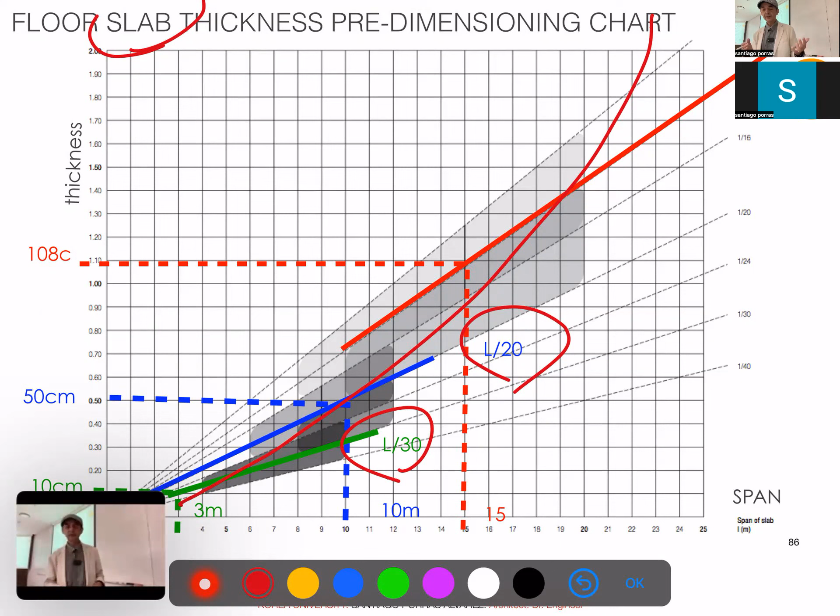If you go larger, say 15 meters, you need much more. Those slabs are used mostly in civil engineering, in bridges and things which need a lot of strength, not in buildings. One beam for 15 meters would probably be 1.5 meters thick, so it's very big, unless you use post-tension or pre-tension, which is a little beyond what we have here. For smaller spans, you can go to 1/30th. So the difference with steel is not very big, right? Right, still you can be a bit more conservative, but the 1/20, 1/25 is like a very universal way of dimensioning for normal spans.

This is what we see in Seoul. The most common approach is to have beams very close together, so the load is reduced and you have longer spans with a very thin slab. So this slab in between, maybe 3 meters, maybe 15, 20 centimeters, very thin slab, so the structure is kind of efficient.

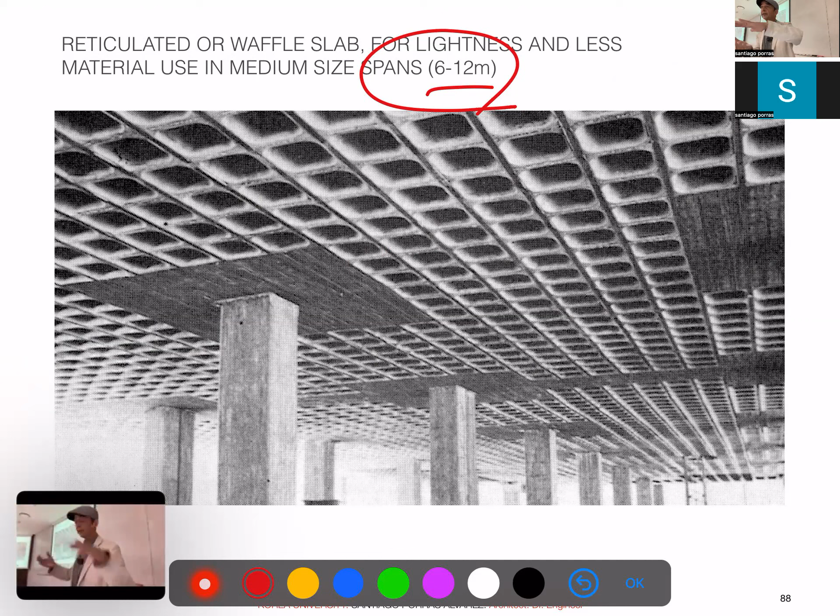For spans between 6 and 12 meters, a waffle slab is great. It's the one we use mostly in Europe since 1960 or so, because it is hard to calculate, right? Here in Korea, after the Sampoong Baekhwajeom disaster, which was a flat slab, people have allergy to the system, but it is great. You can have a really light structure, and it was perfect.

Formwork, we said the concrete is poured and we need to give it a form, so formwork is an important part of the process. I show again this construction. This building has rectangular columns and rectangular beams, so this is made by carpenters. This is a timber chipboard or fiberboard with a plastic melamine interior, so the cement does not stick much and has a very nice clear finish.

And those are created on site, right? It's like really boxes. Once they're created, they are put in their place, right? And then the elements, we'll see later, the form for the thin slab in between is created.

This element is very common also in Korea. It's about 3 meters, 4 meters, and they already have some reinforcement there, so it makes construction very fast and easy, and they become part of the structure. This is like a lost form, right? And since this is steel, it already is working in tension, so it's quite an interesting material.

This is how it is ready for adding the reinforcement. You see here, the steel is just a plane, and people just transport it. It's like very primitive, it looks like a Roman construction, right? And steel is very heavy, so those guys can bring like 2 or 3 bars at a time.

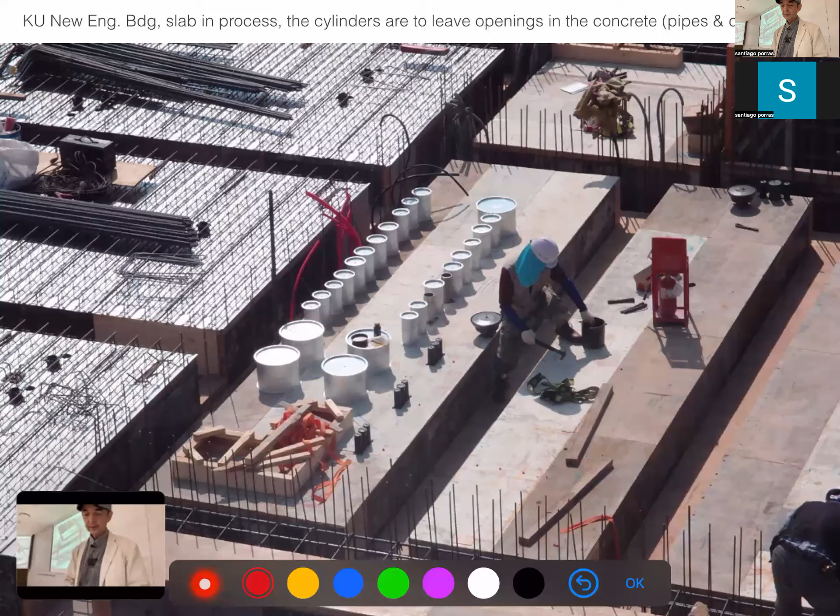And they are put in the proper place, so you complete the full beams, right? These boxes are just to make a hole for the pipes, the ducts for the systems, right? And this is an opening for the stair.

So in that case, you see the 15 centimeter thin slab, because this is a very small span, but still you have a lot of pipes inside and reinforcement waiting for it to be closed later. This is where the crane, the tower of the crane stays, so it has to be closed later.

Stairs are always a complication. It's a good idea to make them in concrete, because as soon as the concrete is hard, you can use them, but during construction it's kind of a small nightmare. This is one of the most difficult parts in the construction, with more errors. We have them always wrong in the sections, in the drawings, no wonder we have even more errors on site.

This is already the structure with all the reinforcements ready, working around the clock. Those colors are the electricity and the piping. Now we have so many systems, and we try to avoid it, because we have areas of concrete which are totally hollow, and this is not calculated. But this is how we do things in Korea, right? In most places, we'll put cables outside of the slab, which is much better, or you will do it in a way you can calculate that loss of material. This is the pump arm for the concrete.

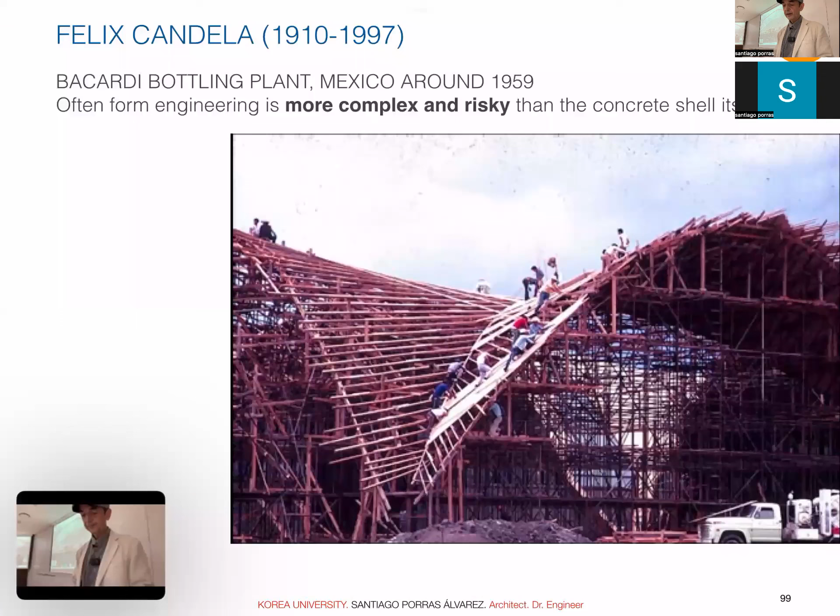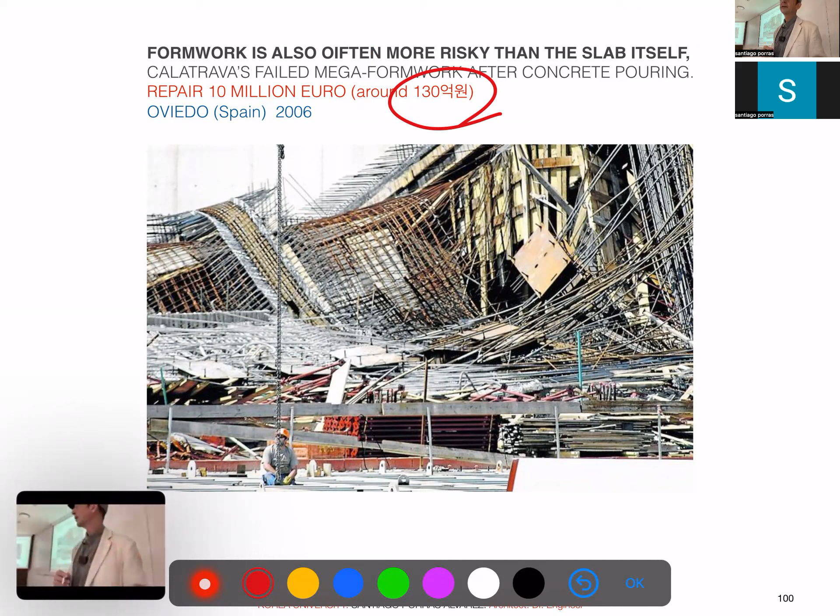So forms are tricky. Make sure the engineers work on them carefully, right? And they're not removed until the concrete is hard. So the rebars need to have some distance to the form, otherwise they will corrode. This is why I put separations or spacers, usually cement or plastic. Plastic, we try to make them as small as possible so we do not lose mass of concrete.

And then once we have it ready, we pour, we compact, pour, compact, and then level. That's the process. Compacting is usually done by a huge vibration machine, so you see a lot of movement. You have the pouring of the concrete, the vibration. This creates a lot of stress to the form, throughout the provisional structure. You have a lot of people working there.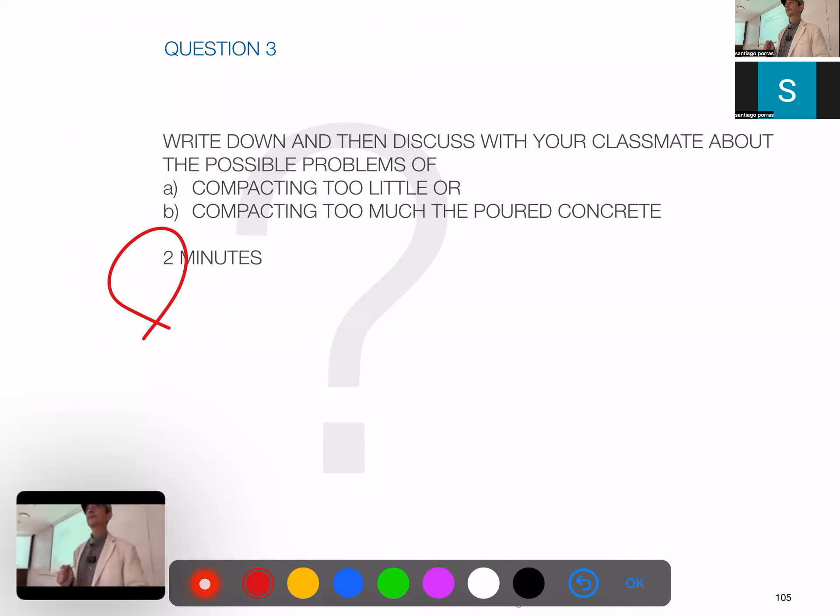Okay, did you write something? It's okay, you can copy what I say later. Important is that you get the idea, right?

So if you compact too little, you have plenty of bubbles in between. Remember that the concrete is a very thick liquid. You have a lot of reinforcement, so you have to be sure that it fills all the gaps. Poor compacting creates very poor concrete. Not only will it create oxidation in the rebars, that section will not have the strength we calculated. So usually it should be demolished and rebuilt, or if it's not too bad, repaired. But repairs are always bad.

If you compact too much, may happen - it happens often in columns. Very difficult to compact because you have to go very deep, right? If you compact too much, you will break the mixture. So you may have all the heavy materials, the gravel on the bottom and the water going to the top. So the mix is broken. If you do pastry, you know what happens when you overmix, right? This is kind of pastry at a big scale. This is why compacting is very specialized and very important. You have to have people who really know what they are doing.

Shotcrete is a special case. It's like very high pressure, just shot to the walls. It is very used in swimming pools and civil engineering walls because you avoid one form. Actually, it's very compact, doesn't need compacting. It's very resistant, but it's also very tricky to apply. So it's nice you know about it.

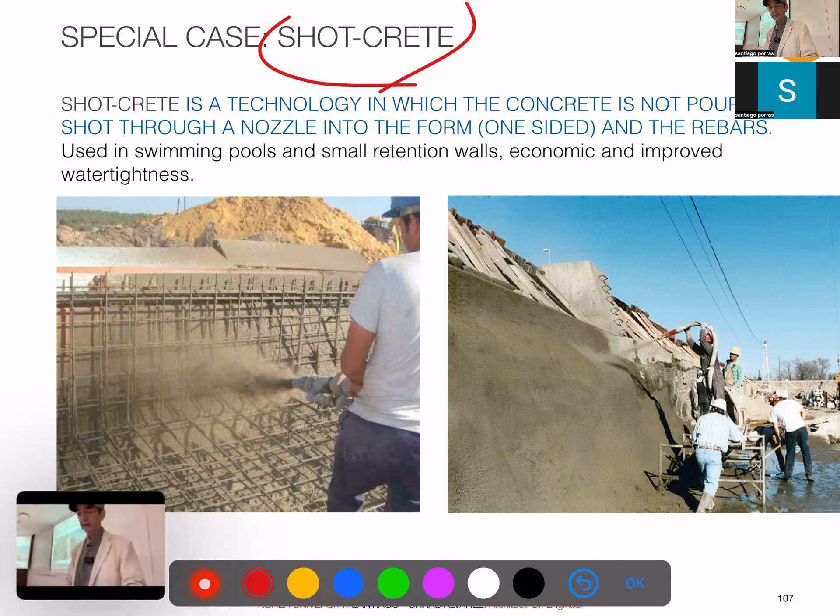Once we have it perfectly done, we need the curing. This is extremely important because we know the water is necessary for the chemical reaction which makes the cement harden, right, to have the whole mix. And that curing lasts for 28 days, it's a full month. So people in charge of the construction have to be sure the concrete is not dehydrated, but there's not too much water either.

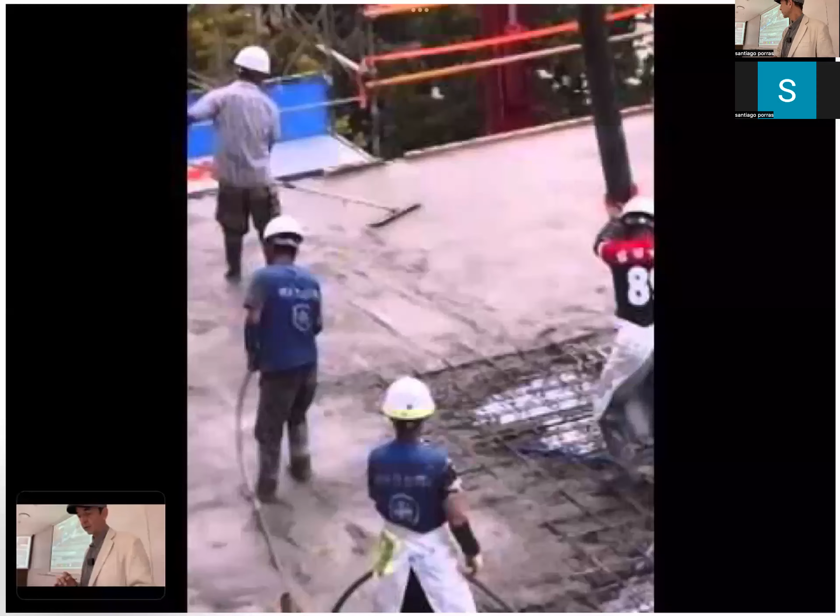And I have two small clips. Let's see if they work. Didn't work. Let's see if this goes on. Well, they didn't work, but you have them in the links if you want to see them. You can see the real life process of this kind of pouring and compacting and so on.

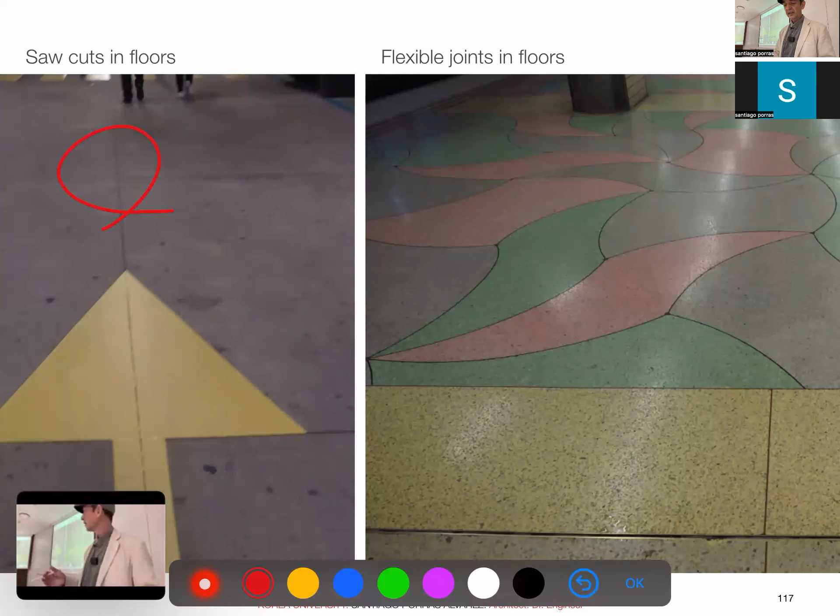In floors, for example, people will cut it once hardened, like 3 by 3 or 4 by 4 meters. And still it can crack, right? Or you may put flexible joints. So you have very small bits of concrete, and the effect of retraction and expansion later will not be so visible. And the cracks are natural. We try to avoid them by being more careful with the reinforcements or with additional fibers, but it's always annoying, right? Those cracks always appearing in the news were probably just due to the nature of the concrete material, not really pathological, not a problem of the structure. Being able to distinguish between both is important, but it's a little bit beyond our course.

The book has a bit more detailed tips on how to produce concrete. You will see it in the handout. You can read it if you want.

And exposed concrete, as it is poured, we can give a texture with the form, as we are used to seeing, or we can apply the same treatment we apply to stones. So you can have sandblasting, bush hammering, chiseling. You could probably even flame it, but on site it's a little bit difficult, right? And it's a bit aggressive. And this is from the book also, a listing of the finishings you have.

And then we have special concretes, which I will just list because some of them are very used, some of them are kind of curiosities. Hemp concrete is just adding vegetal fibers, hemp, to the mix instead of steel. That's used for the small light concrete bricks, right? They are insulating. Translucent concrete was a hype a few years ago. It has optical fiber lines inside, so you can see the light through. It's quite interesting. It's thin elements of concrete that are cut to have this kind of transparency.

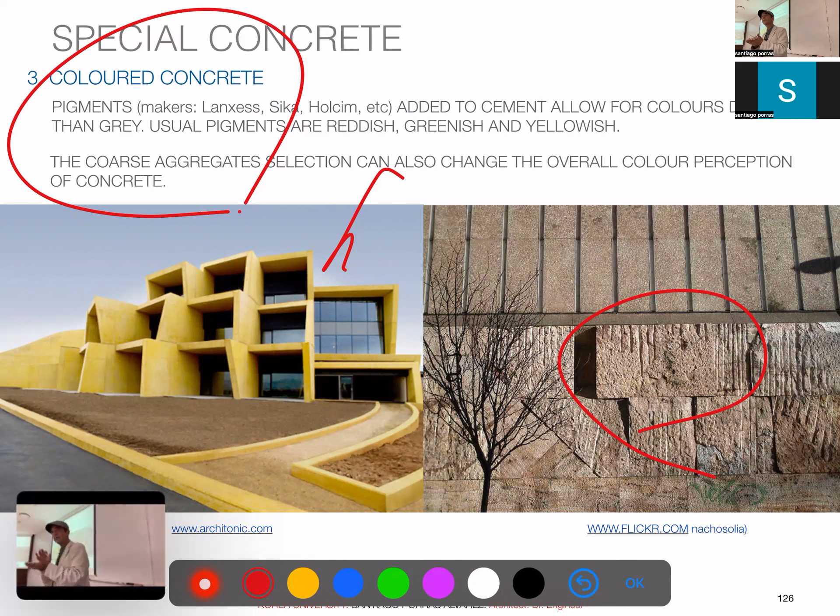Colored concrete is very common, right? And I put yellow because I always wanted to have a yellow concrete, and apparently it's very expensive, depending on the color, with just added colorants. Of course, changing the gravel type can also have an effect on the final color of the concrete, right?

Light concrete: instead of gravel, you use light elements. Usually it's expanded clay, things like that. Mostly used in bricks or light concrete for roofs.

And fiber reinforced concrete is interesting because it is very hard. The fibers in that thick element are very hard to mix, right? But if you have it, you can avoid having the reinforcement bars, and you can have much thinner, much lighter concrete, because the steel adds quite a lot of weight. You have mostly prefabricated elements, light construction, usually with fiberglass, nylon, even steel, but steel again will corrode because some of those steel bits will appear in the surface.

Terrazzo is a very specific way, a very thin plate of cement with very well chosen elements of gravel, right? And then it's polished to have all these textures we have around. We have many of those. It's done on site or in factory with tiles. The old buildings around the campus all have this kind of thing; you will see it in the stairs, in corridors, and so on.

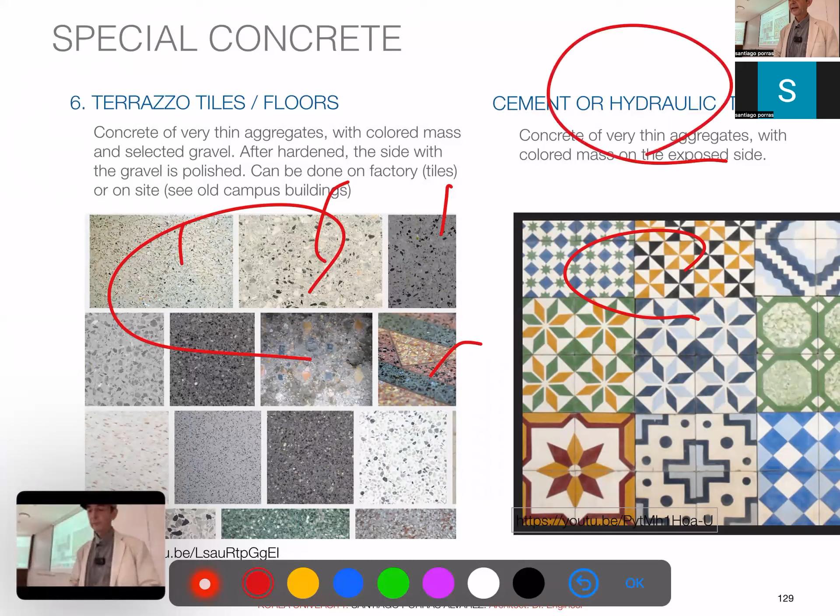And what we call hydraulic tiles is the same, but instead of using the gravel, they use just a powder of cement with different colors, and then they are hardened and polished. This was a very cheap kind of pavement. Now it became kind of vintage and very prized, very much sought after because they're interesting. But it used to be cheap. It has a lot of hand labor. Now they are very expensive, which is also interesting.

And with that, there's many more. We cannot go into it. So many interesting things there. And I don't want to go beyond the time. We are already 2 minutes beyond.

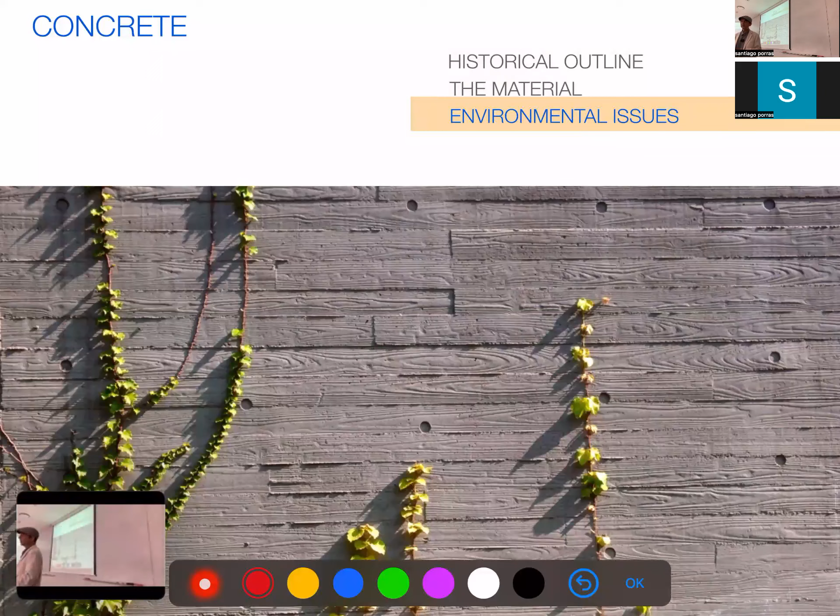Environmental issues, you can read. I will explain only one thing, which is important. So, you know, pollution and all those things, health. Of course, the fat added to the forms to be able to separate them is also polluting. About energy, we are at the limit of high energy.

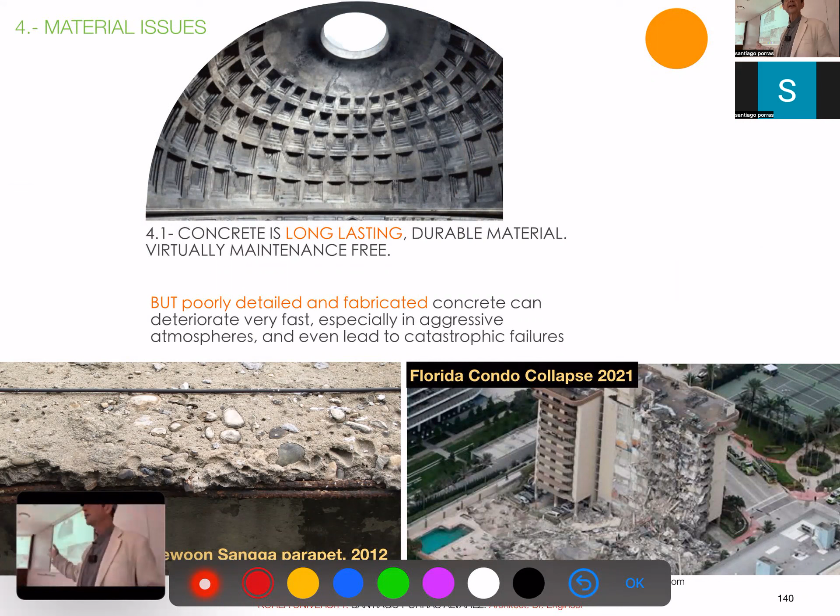And durability: the secret for durability is good detailing, good engineering, right? If it is not well detailed and maintained, we have those kinds of collapses, like the Florida collapse last year. It was bad engineering, bad maintenance, and bad everything. Shouldn't have happened. And just one addition: vertical cracks in the columns. Be very aware of them.

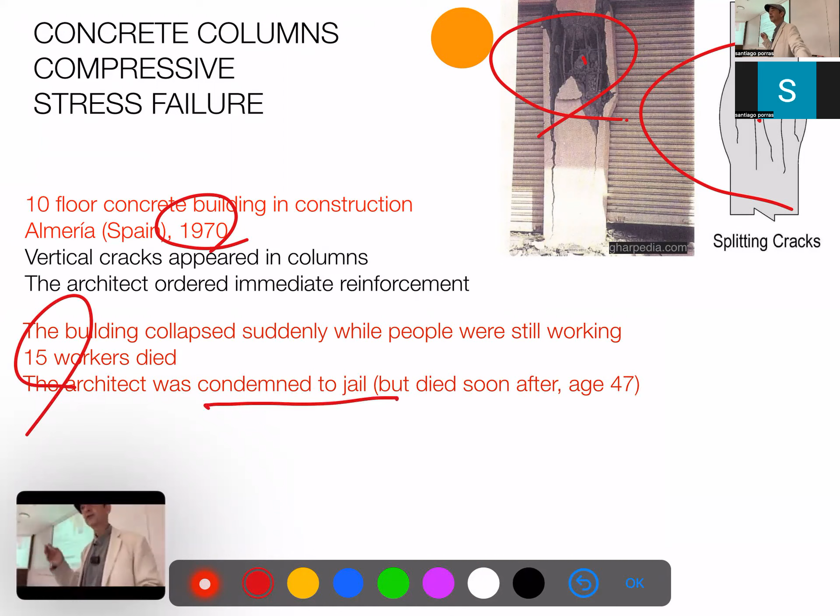In 1970, this was a 10-floor apartment building by one of the professors in my school. I went to school in 1979, so it was quite recent in everybody's memory. And he was the guy who wrote the book on concrete, so he knew a lot. He saw the vertical cracks and said, okay, I have to reinforce with additional elements. But before they could do anything, it collapsed, and 15 people died. He went to jail. He had a very strong sense of responsibility, so he died just a bit later.

In the end, it was discovered that the cement maker had saved money by adding too much lime to the mix, so the hardening was much slower than usual. It was a very painful thing, those vertical cracks. Retraction cracks are okay, but cracks in the column are serious, especially when they are clear, persistent, and they appear there, right? So don't forget them.

But fly ashes have many kinds. If we replace as much as 40% of the cement by good quality fly ashes, we have very strong cement, right? And we save a lot of material. This is regulated because it may help you, or we may make a disaster of concrete. Waste is waste anyhow. This is very regulated, but you have to be aware of it because it is repeated all over. Usually you don't have to worry because the concrete companies already have their own regulations and they inform you if they have it, okay?